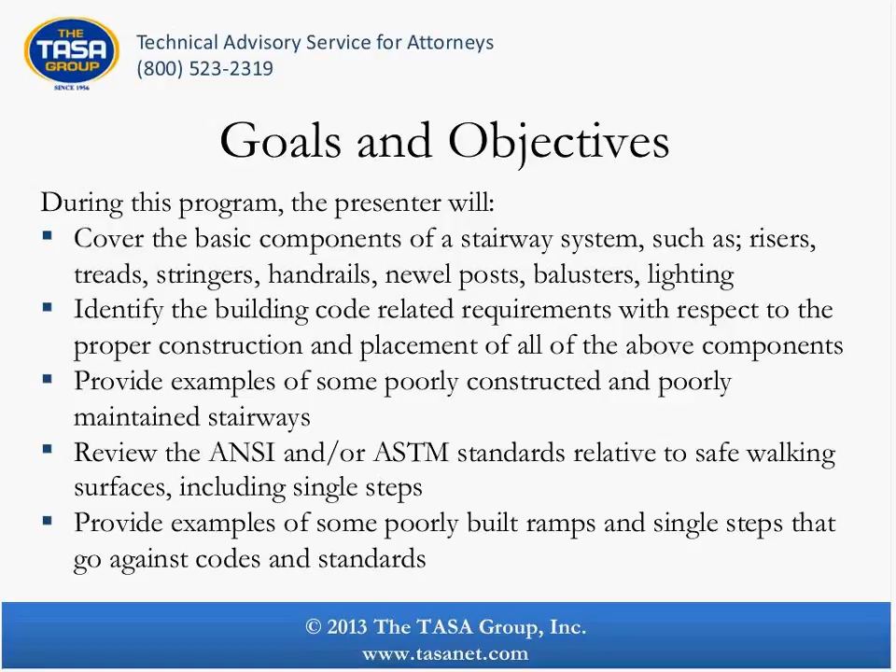During this program, the presenter will cover the basic components of a stairway system, such as risers, treads, stringers, handrails, newel posts, balusters, and lighting. We'll identify the building code related requirements with respect to the proper construction and placement of all of the above components, and provide examples of some poorly constructed and poorly maintained stairways. We'll review the ANSI and/or ASTM standards relative to safe walking surfaces, including single steps, and finally provide examples of some poorly built ramps and single steps that go against codes and standards.

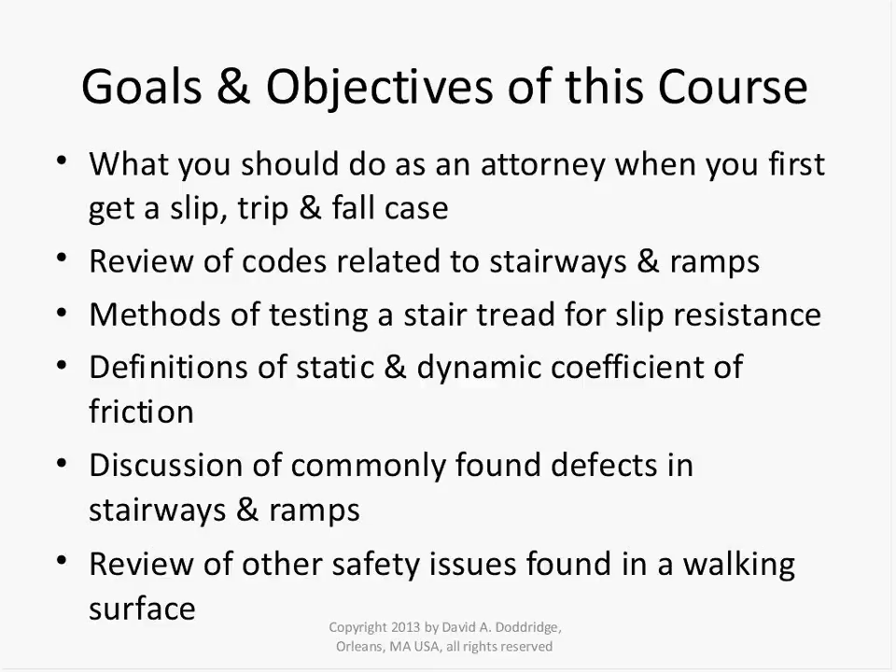The goals and objectives of this course: again, what you should, as an attorney, first do when you get a case. We're going to review codes, methods of testing a stair tread for slip resistance, some definitions of coefficients of friction, commonly found defects in stairways and ramps, and some other issues as well.

So what should you as an attorney do when you first get a slip and fall case? Go to the scene immediately. Take pictures from all angles in an attempt to preserve the scene. The more the merrier. You can't take too many pictures. There could be something in there that your expert that you may hire in the future would pick up on that you may or may not feel was important.

Sit and watch the scene for 20 minutes or so. Sometimes, and again, this is advice from other highly experienced personal injury attorneys, watch the scene. Just stand there and observe, and sometimes you can often find liability just by observation.

Weather conditions may or may not affect the scene. You want to find out what the weather conditions were on the day of your client's accident. It might be an outside stairway. It might be a stairway leading down into a subway, which I actually have some photographs of. And those are all subject to wet conditions.

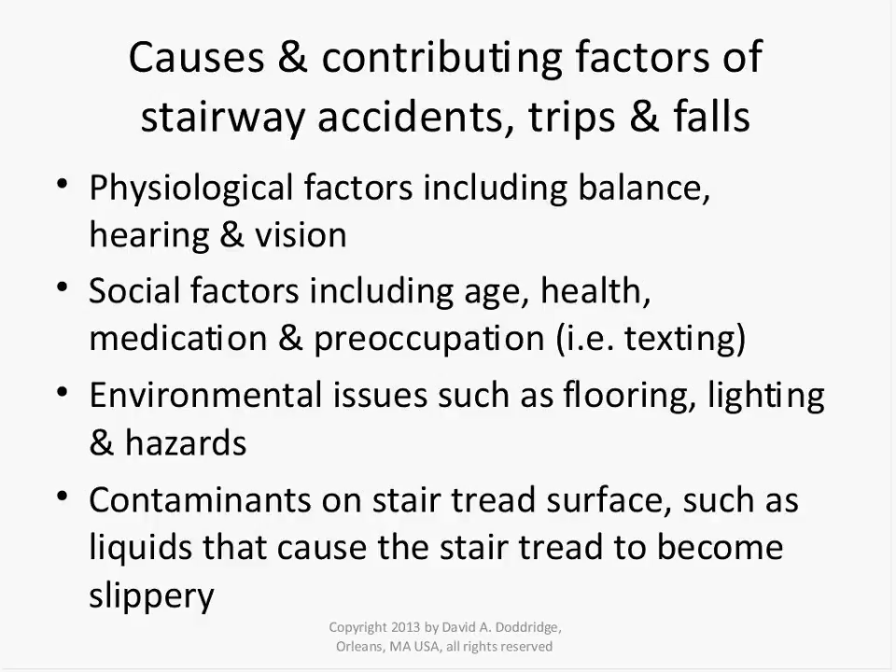So, causes of stairway accidents, trips, and falls: physiological factors, of course - balance, hearing, vision. One client of mine who gave me some advice for this presentation said that once he went out to a scene and observed a lot of older people walking up and down this stairway. Come to find out there were 4 nursing homes or complexes in the immediate area geared toward an older population, so there were much older people walking around that area.

Social factors, of course: age, health, medication, preoccupation like texting, which can certainly preoccupy somebody. Environmental issues such as flooring, lighting, and hazards - hazards meaning things that are in the way that could be moved. Contaminants on stair tread surface, such as liquids - maybe somebody spilled some coffee or water that could cause the stair tread or landing to become more slippery.

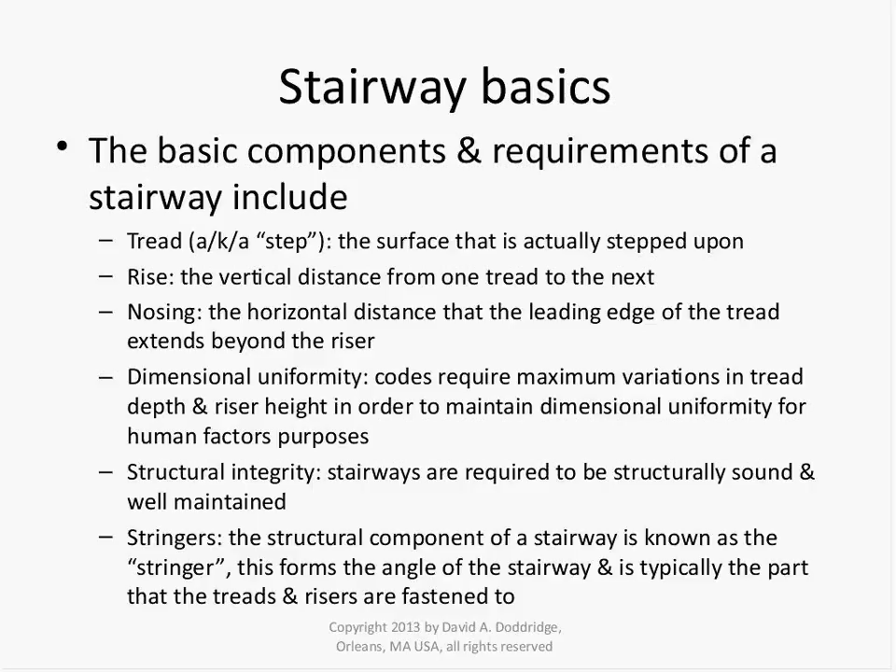Okay, now here we get into the basics of a stairway, basic components of a stairway. The tread, also known as the step, is the surface that is actually stepped upon. The rise is the vertical distance from one tread to the next. The nosing is the horizontal leading edge of the tread that sticks out beyond the vertical riser. And there are codes with regards to that, which we'll get into with some of the pictures and diagrams I have here.

Dimensional uniformity is important - codes require that the riser height and the tread or step depth not vary by more than 3/8 of an inch from one to the next. For human factors purposes, I've got some good examples of that as well. If you're walking down a stairway and each riser height is the same from one to the next, and then you get to the last one and it's an inch shorter, all of a sudden your foot finds ground much quicker, and that can cause some problems for certain people.

Structural integrity of the stairway, of course, should be well maintained. Stringers - I don't know if you've heard this term before - the stringer is the structural component of a stairway that the risers and treads are actually fastened to. So that's a structural component of the stairway.

Handrails, of course, we all know what handrails are. They are to be placed at a specific height above the leading edge of the stair tread - by leading edge, I'm talking about the front edge of the step. Handrails are to be no greater than 2 inches in width for gripping purposes.

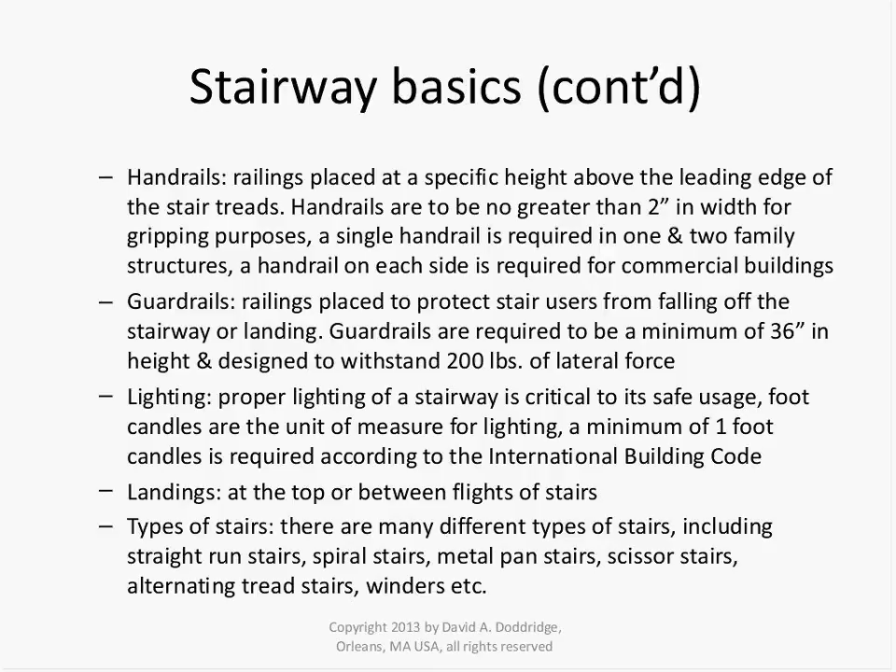A single handrail is required in 1- and 2-family structures, while a handrail on each side is required in commercial buildings.

The guardrail can also act as a handrail. However, if you observe a stairway where the handrail comes up to a landing or another level, and the railing is there, that would be considered a guardrail. Guardrails are required to be a minimum of 36 inches in height and designed to withstand 200 pounds of lateral force, which is a considerable amount of force.

I know somebody whose daughter lost her balance as she was ascending the stairway recently. Her body went up against the railing, the railing gave way, and she fell and broke her ankle. So that is certainly a code violation.

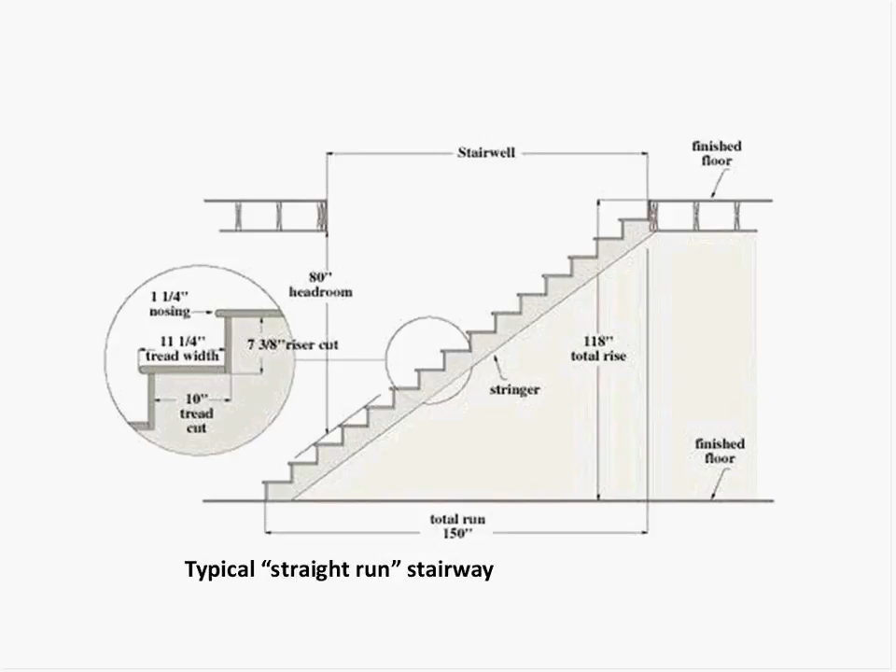Lighting, of course, is critical. Minimum lighting for a stairway at the tread level is 1 foot candle. A foot candle is a unit of measure used to measure the strength of lighting.

Landings, of course, are located at the top or in between flights of stairs.

There are lots of different types of stairs that we see: straight run stairs, spiral stairs, metal pan stairs, scissor stairs, alternating tread stairs, winders, etc. And I have some visual examples of all of that.

This is a straight run stairway. This is a close-up view of the relationship between the riser, the tread, and the nosing.

This is the riser height right here. This is the tread depth or width right here. And this piece here is known as the stringer, which is a structural piece upon which the treads and risers are attached.

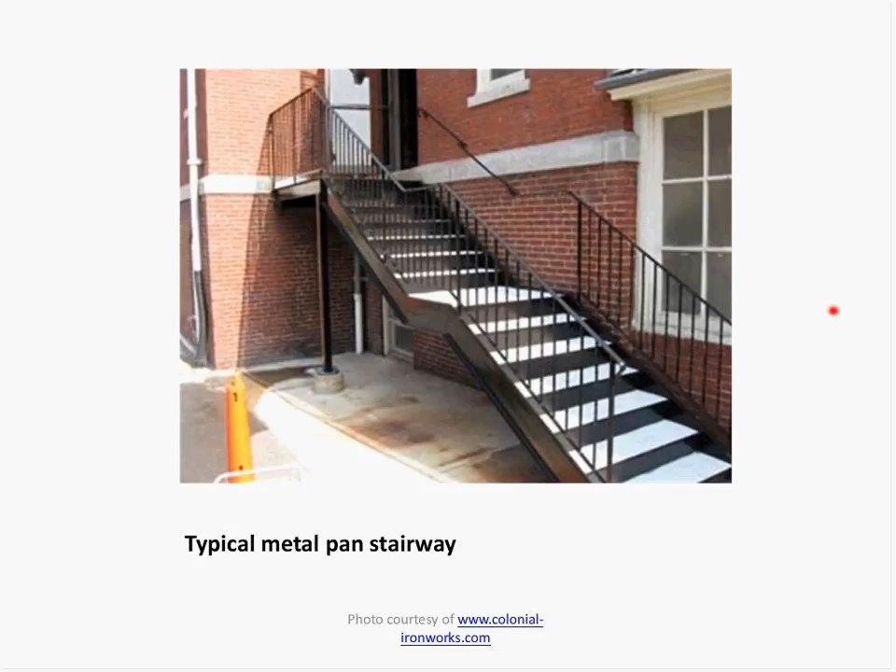This is the headroom of 6 feet 8 inches, or 80 inches, measured from the leading edge of the treads up to this point. So that is a straight run stair.

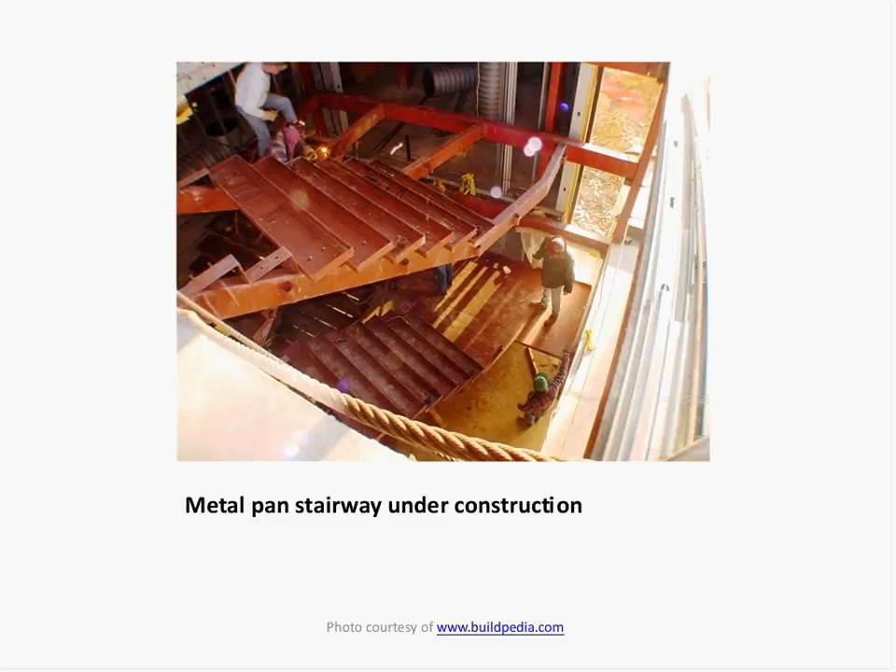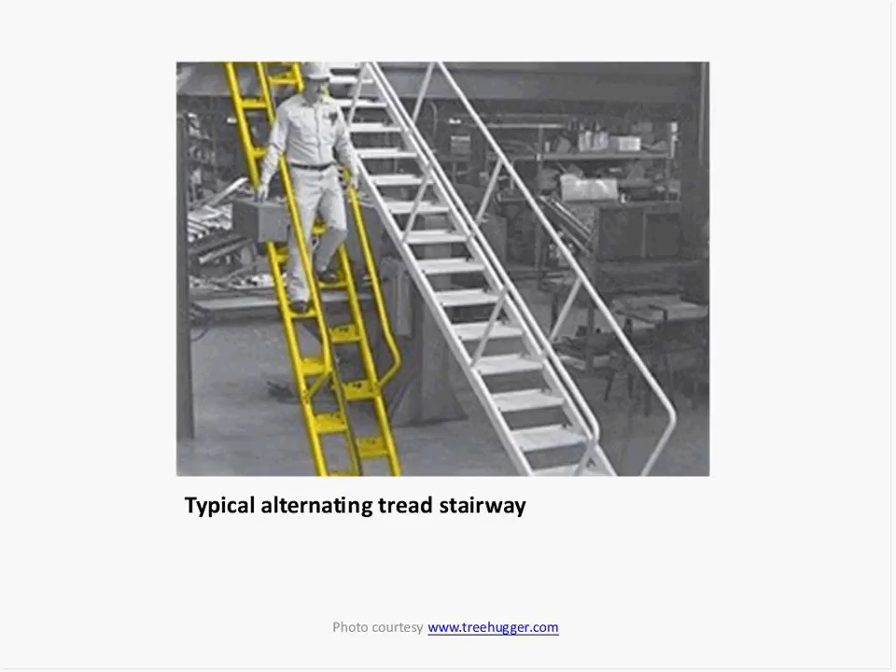Here's a metal pan stairway under construction, to illustrate what we mean by a metal pan stairway. Here's the stringer right here, and here are the steps or the treads. These get filled in, so they're in the shape of a pan, filled in with concrete.

Metal pan stairways, as per OSHA guidelines, are not allowed to be used by workers, other than those assembling it, until the pans are filled in with concrete or a temporary wood surface. They may not want to pour the concrete during a certain phase of construction because it's messy and takes time to dry and set up and so on.

This is an alternating tread stairway, which has very limited allowed uses under the building code, and for obvious reasons. They're not safe. They're a space saver.

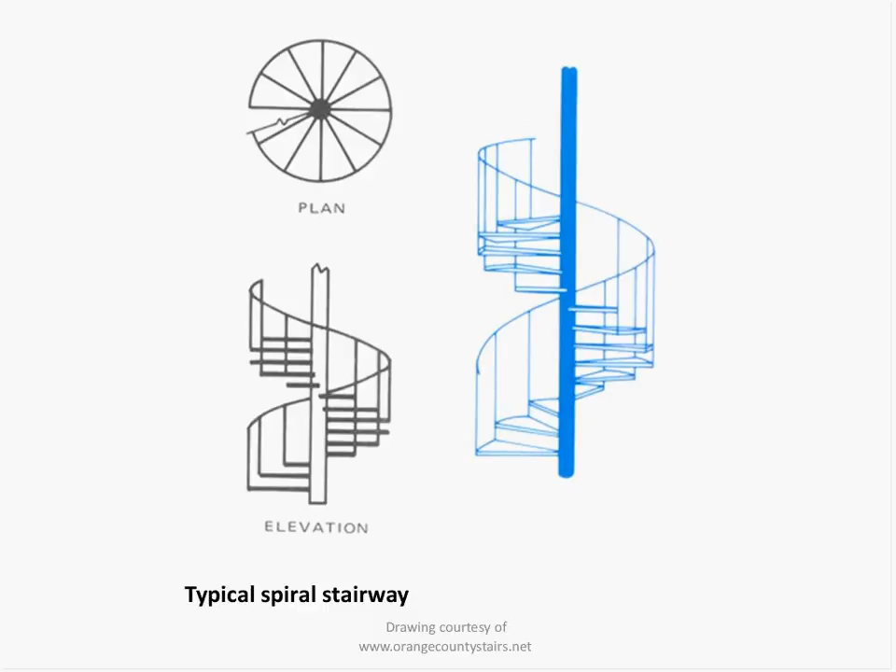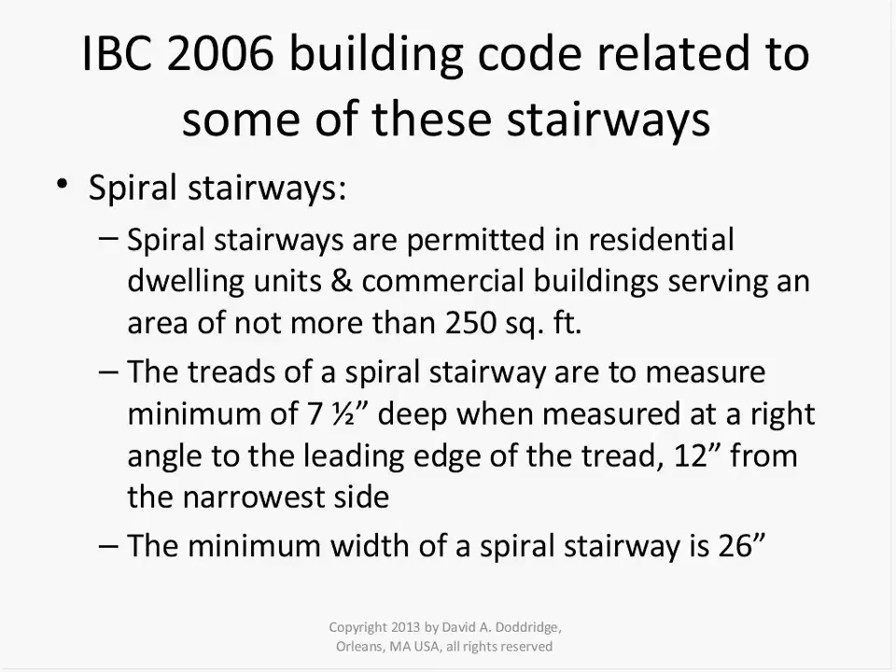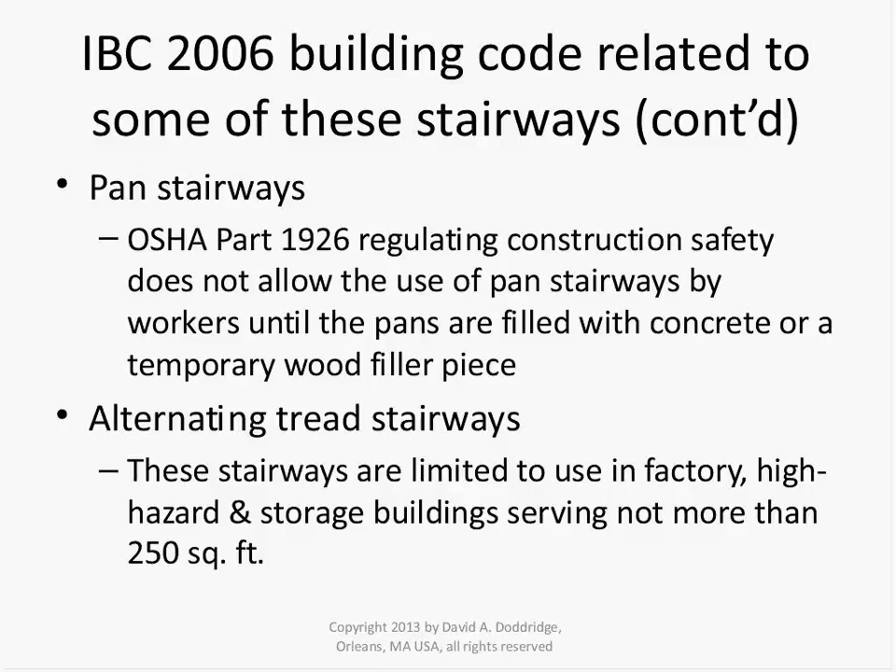The IBC 2006 Building Code, from the International Code Council, authors building codes known as model codes. They are adopted by states and municipalities as their own building codes, sometimes with amendments. For example, Rhode Island has adopted the IBC 2006 with Rhode Island amendments, usually dealing with areas subjected to more wind load. They're usually not amendments that affect a basic building component such as a stairway; it's more specialized than that.

Spiral stairways are permitted in residential dwelling units and commercial buildings that serve an area of not more than 250 square feet, which is a small area, like maybe a mezzanine. The treads of a spiral stairway must measure a minimum of 7.5 inches deep when measured at a right angle to the leading edge of the tread, 12 inches from the narrow side.

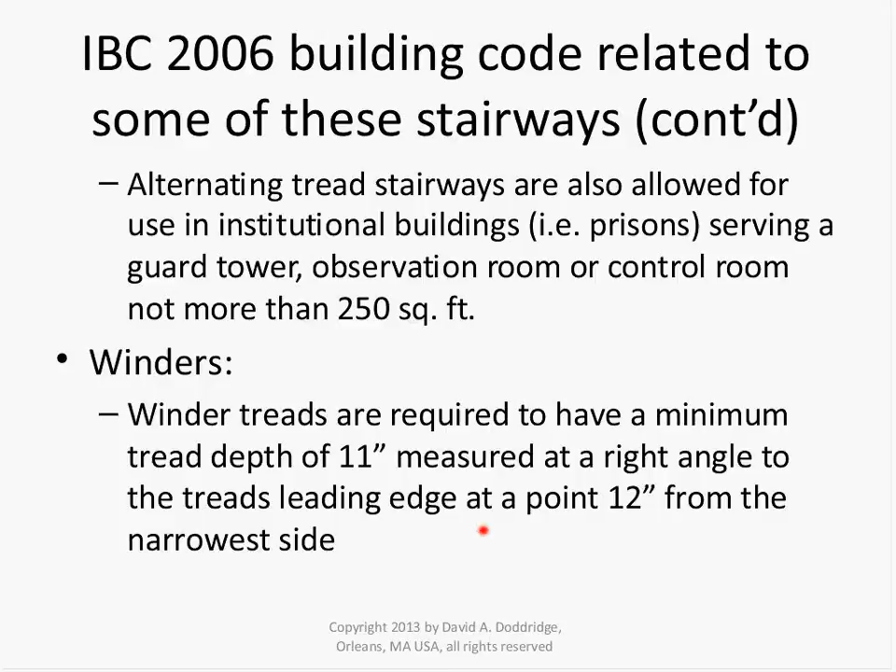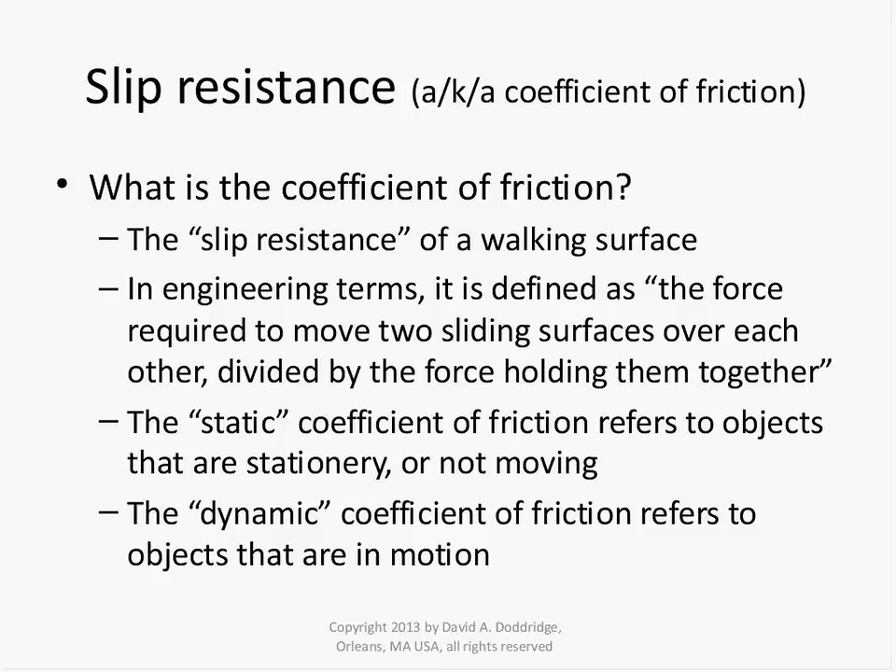So if we go back to... when you measure 12 inches out from this edge at a right angle, it is not to be less than 7.5 inches in this direction. So that's an example of what is in the IBC 2006 relative to codes related to spiral stairways.

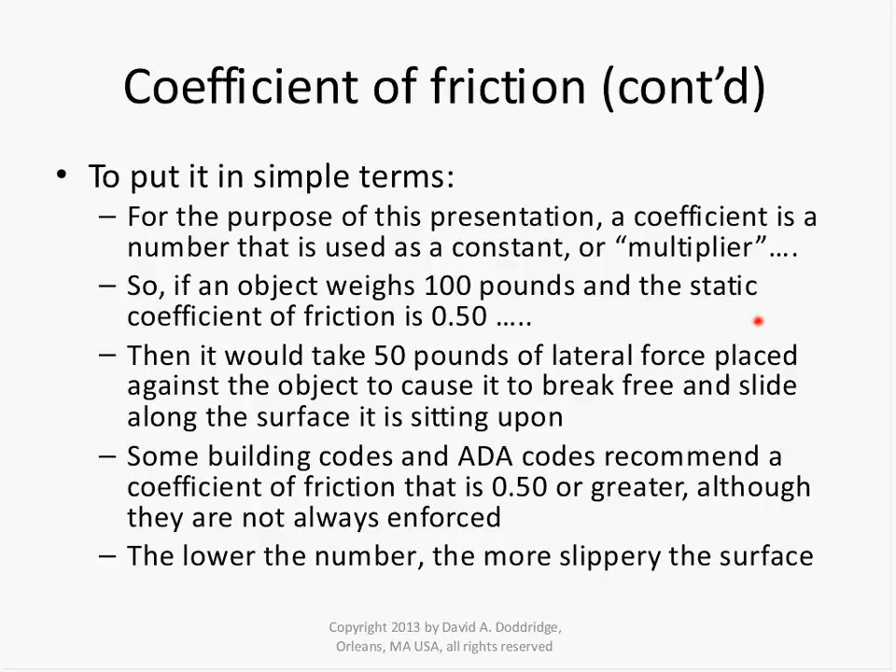Pan stairways, as I mentioned earlier, OSHA Part 1926, which regulates construction safety, does not allow the use of a pan stairway by workers until the pans are filled in. I had a case in Connecticut with this exact scenario. The pan stairway was built, the railing had not been installed yet, the pans had not been filled, and an older man, a plumber working on site, decided to use that stairway even though it was sort of blocked off. His foot caught on the edge of the pan, and he fell 12 feet over the side since there was no railing installed yet. He really got hurt.

Alternating tread stairs are very limited in their use. They can be used in factory, high hazard, and storage buildings serving an area not more than 250 square feet, which again is a pretty small area. Alternating tread stairways are also allowed in institutional buildings, such as prisons, serving maybe a guard tower, observation room, or control room, again not more than 250 square feet.

Winders. Winder treads are required to have a minimum tread depth of 11 inches, unlike a spiral stairway which is 7.5. Again, you measure from the narrow side 12 inches out along the leading edge. At a right angle, you measure 11 inches in, not to be less than 11 inches.

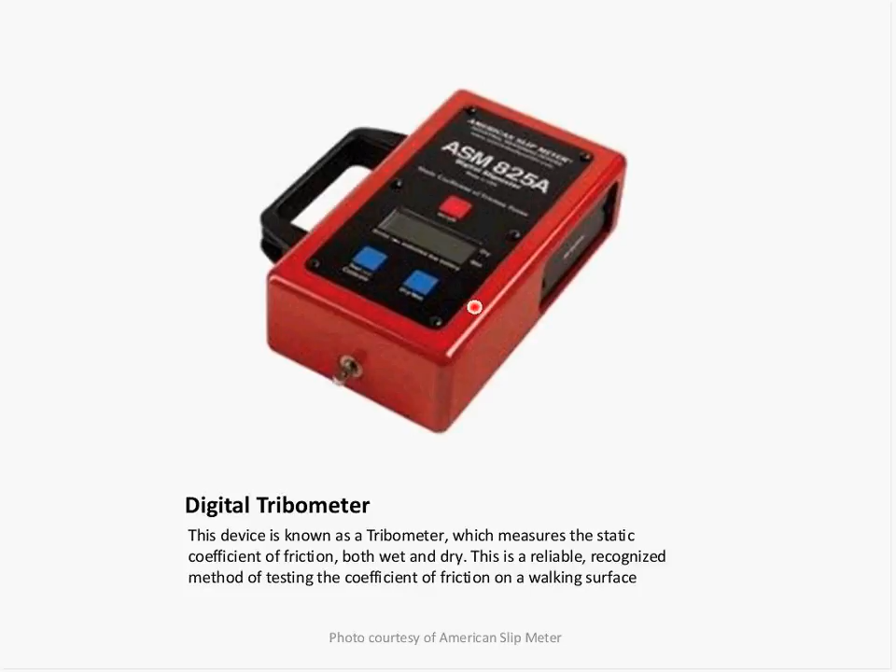Now we're going to get into the coefficient of friction. What is the coefficient of friction? It defines the slip resistance of a walking surface. In engineering terms, it's the force required to move two sliding surfaces over each other, divided by the force holding them together. I'll simplify that in a moment.

Static coefficient of friction refers to objects that are stationary, like your coffee cup sitting on your desk. Dynamic coefficient of friction refers to objects that are in motion, like a toboggan sledding down a hill. To put it in simpler terms, coefficient is a multiplier, a constant that is used. So if an object weighs 100 pounds and the static coefficient of friction is 0.50, you multiply 100 pounds times 0.5, and you come up with 50 pounds of lateral, sideways force placed against the object to cause it to move or break free of its static friction.

Building codes and ADA codes recommend a coefficient of friction of 0.5 or greater. They're not always enforced. Actually, ADA is 0.6, and for ramps, ADA recommends 0.8. The lower the number, the more slippery the surface.

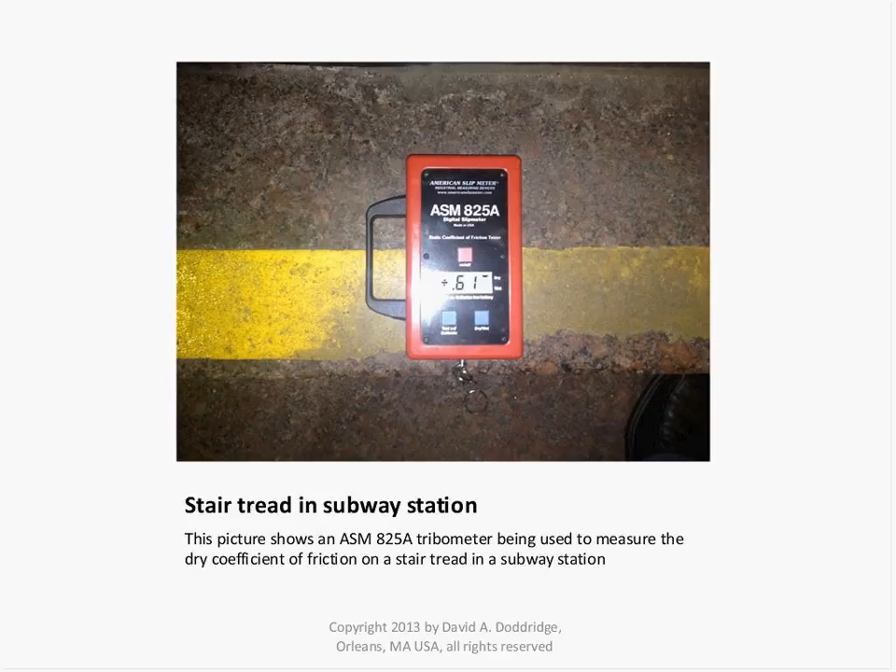This is a tribometer, a device used to measure the coefficient of friction. This is the one that I use. It is a reliable, recognized method of taking the measurement.

There are 3 feet on the bottom that screw in that have neolite pads on them. Neolite is the typical shoe material. It comes with a line and a ring that you hook onto this device, this little end here. You hold your hand out in this direction, place it upon the floor, and use your index finger to pull that line gently but steadily until the tribometer moves. When it moves, that means it has broken free of its static friction, and it will record that measurement right up in here. So that is a tribometer.

This is my tribometer that I used to measure the coefficient of friction on the stairway in a subway station. An experienced personal injury attorney wanted me to measure this set of stairs and another set of stairs that he felt would be safer. And in fact, he was right — the coefficient of friction on the other set of stairs was considerably higher than on this particular stairway. They're both at subway stations in the same city. I think he was trying to present his case as if to say, look, this subway station stairway is safer than the one my client was injured in. So I thought that was interesting.

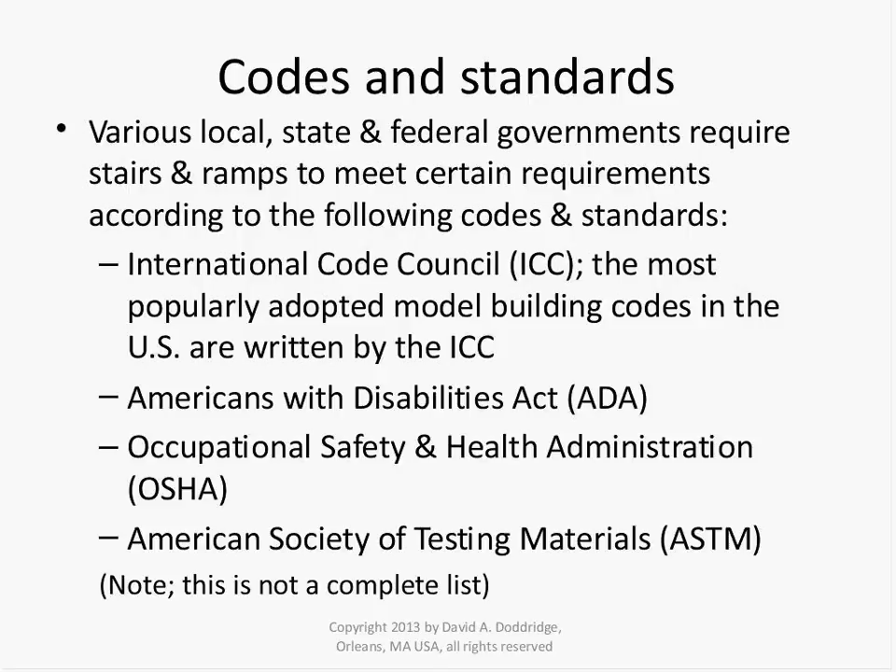That's one of the reasons why you want to make note of the weather on the day of your client's accident, and the time of day, if it's an outside stairway, which would provide more or less natural light. So if the accident happened on a sunny day, you want to inspect the stairway under similar circumstances, but that's about all you can really do. Some of these cases are a couple of years old. But I think that's one of the reasons why the attorney clients I consulted for this presentation suggested going to the scene immediately and interviewing witnesses immediately, so you can try to preserve the scene. That's about it.

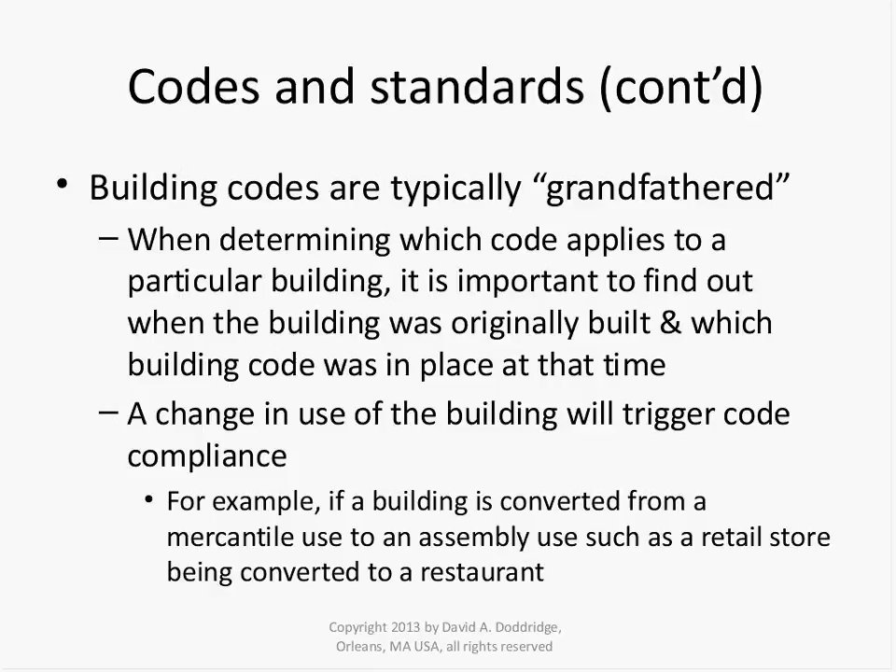It depends on the area that you're testing or auditing the floor in. 0.5 or greater is always the goal. In certain other situations, 0.6 is going to be the goal — for example, in a wet area like the side of a pool deck, it's always wet. If it's wet and it measures 0.6 or greater, then you're in pretty good shape. And of course, ADA recommends 0.8 on a ramp. So 0.5 to 0.6 or greater, whether wet or dry, would be considered good.

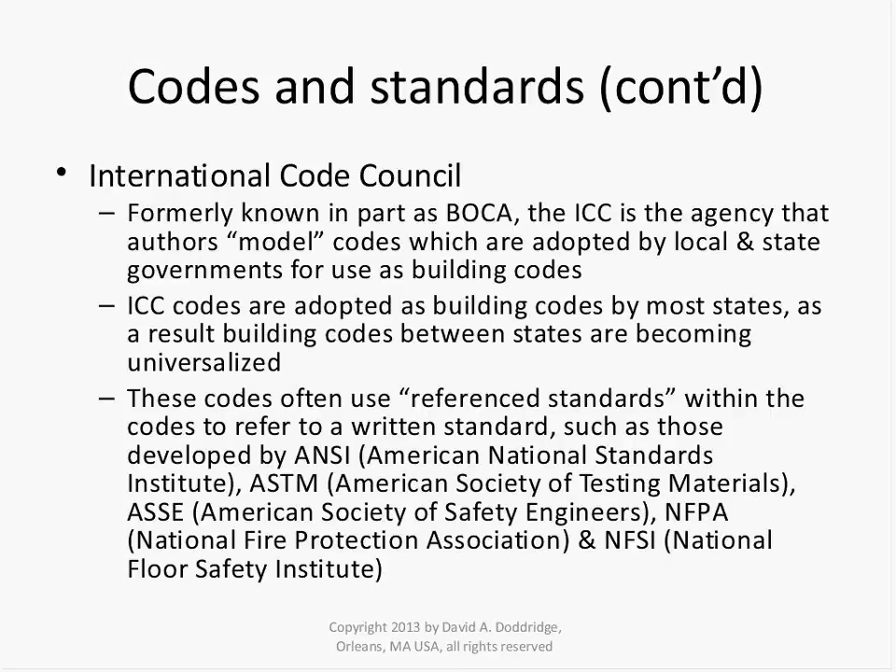A public park is not really necessarily subjected to building codes. Building codes are for the purposes of planning and designing a building — a park is not a building. So that being the case, there would be other standards or codes that could apply.

Typically, commercial buildings with an occupant load of 50 or more, for interior stairways or stairways that lead directly up to the building, are going to require handrails on both sides of the stairs. We're going to get into that with some drawings that I have here.

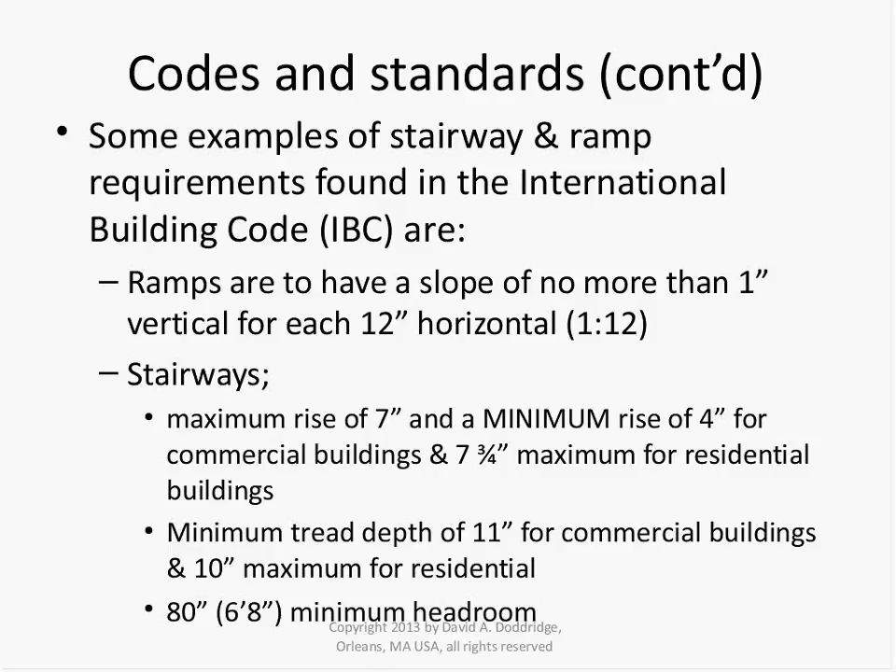But an outside park wouldn't necessarily be subjected to compliance with a building code. There could be other codes or standards that would be more specific to the municipality that the park is located in.

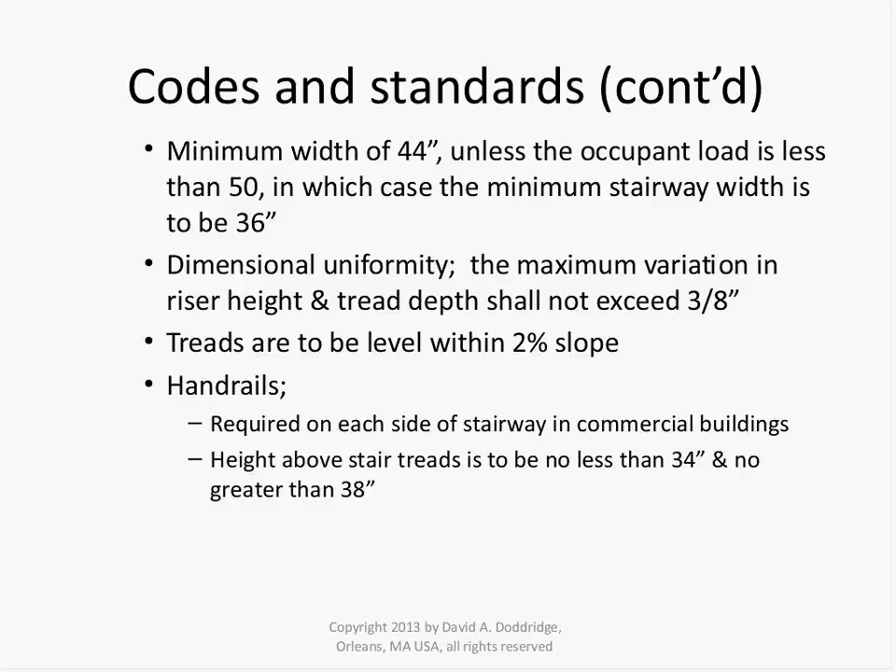Building codes are typically grandfathered in. So when you determine what code applies to a particular building, it's important to find out when the building was originally built and which code was in place at the time. In New York, for example, an old theater—it was built as a theater, it still is a theater, and as long as it's always been a theater, the codes in place at the time of the theater's construction are the codes that apply to the building today.

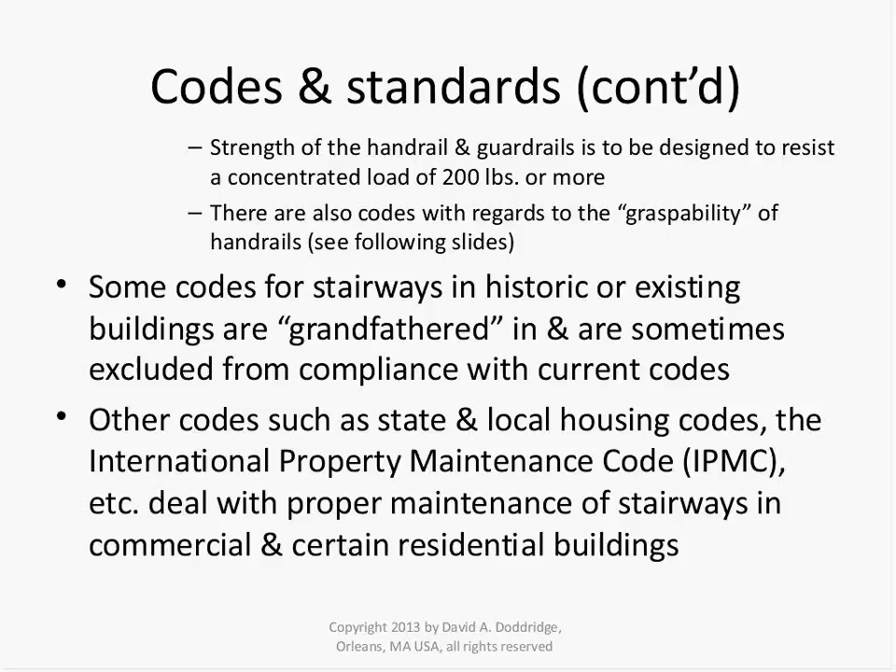When you have a change of use in a building or a space within a commercial building, that triggers code compliance. For example, if the building is converted from mercantile to assembly—such as a retail store being converted to a restaurant—then the restaurant would have to comply with codes relative to assembly usage rather than mercantile usage. So that triggers code compliance.

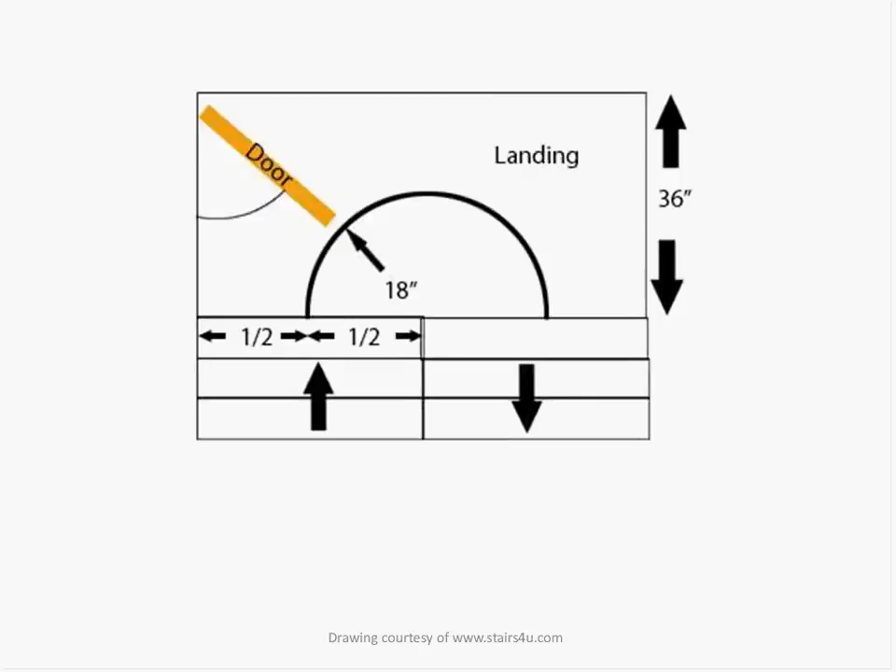The International Code Council, formerly known in part as BOCA, is the agency that offers model codes that are adopted. Many states are adopting ICC codes, so codes from one state to the next are really becoming quite universalized and standardized.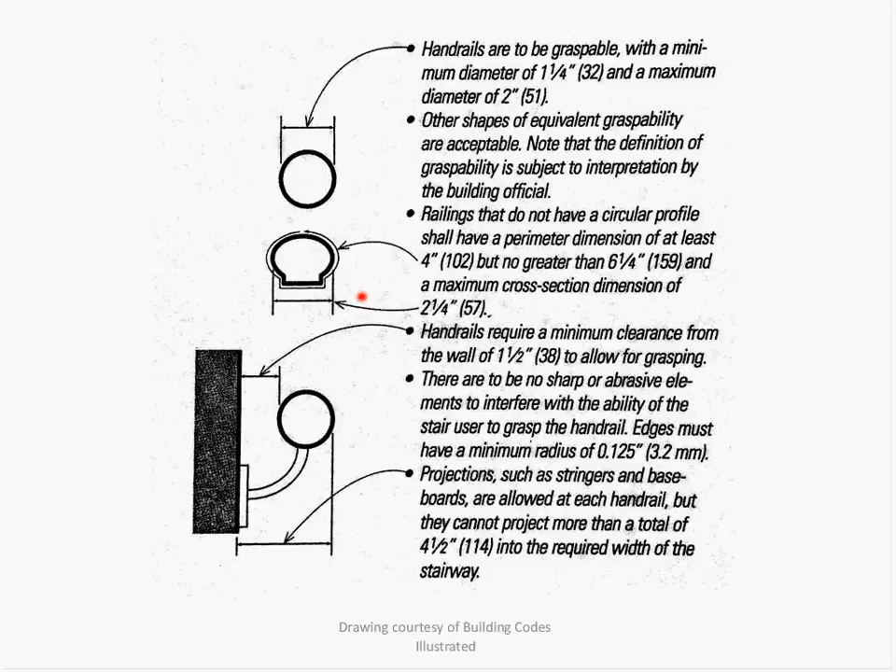Within these building codes, they use reference standards. Some of those standards are developed by ANSI, by ASTM, and ASSE—the American Society of Safety Engineers—is a popular one. These are all private nonprofit organizations that write these standards, and those standards are listed in building codes as reference standards, usually in an appendix. In the writing of codes, it will say that a door is to meet NFPA such and such standard for fire protection, and that kind of thing. So that's how codes work.

Some examples of stairway and ramp requirements found in the IBC: ramps are to have a slope of no more than 1 inch vertically for each 12 inches horizontal. So if you measure horizontally 12 inches, it cannot rise more than 1 inch. That's for a ramp.

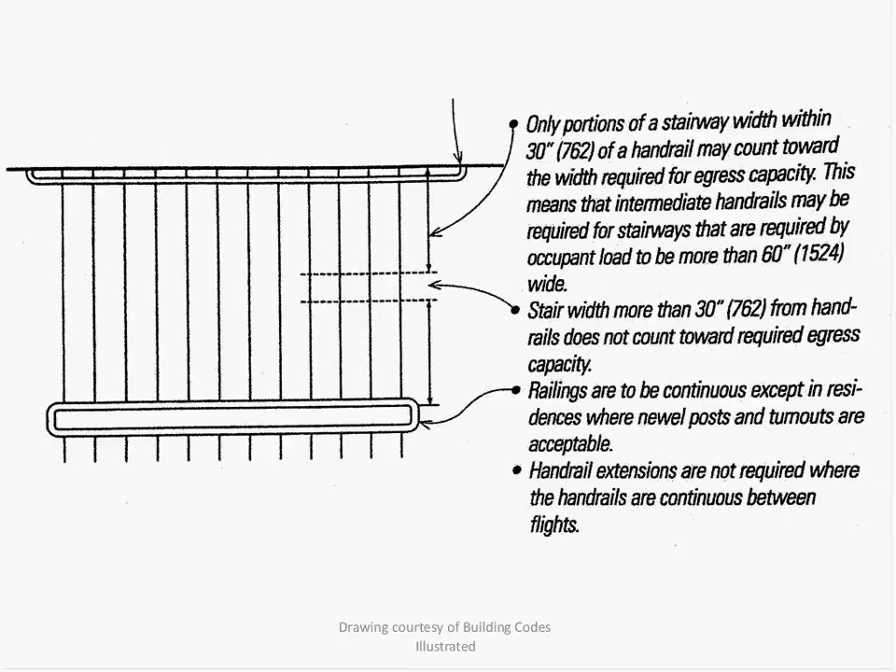Stairways have a maximum rise of 7 and a minimum of 4 for commercial buildings. Minimum of 4 because if it's less than that, it really just causes a trip step—I've got an example of that. 7 3/4 is the maximum for residential. Minimum tread depth in commercial is 11 inches, minimum of 10 for residential, and the headroom is 80 inches minimum.

Minimum width of 44 inches unless the occupant load is less than 50, in which case the minimum width can be 36. We discussed dimensional uniformity earlier—the variation in tread depth and riser height shall not exceed 3/8 of an inch throughout the entire stairway, and the treads are to be level to within 2% of the slope.

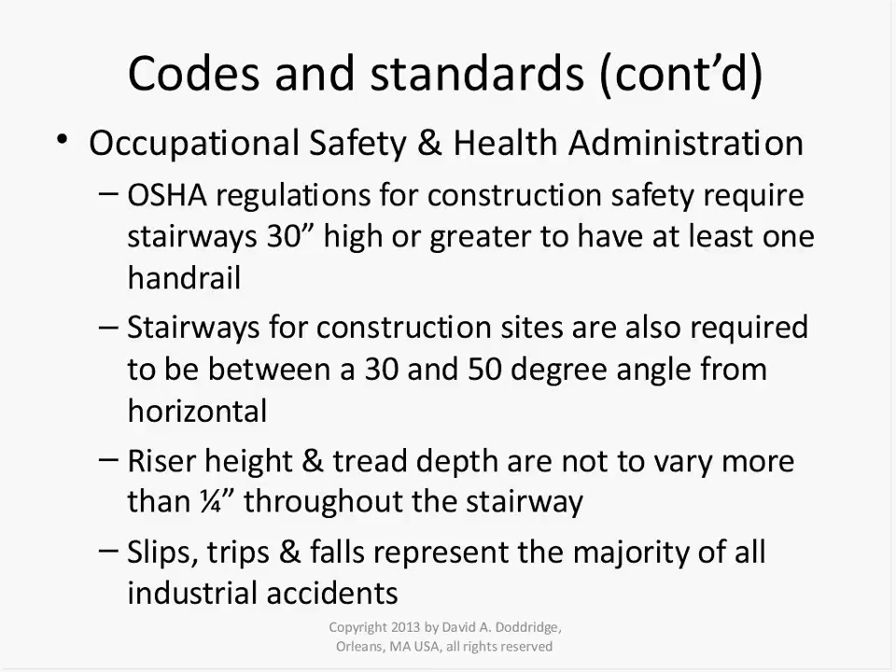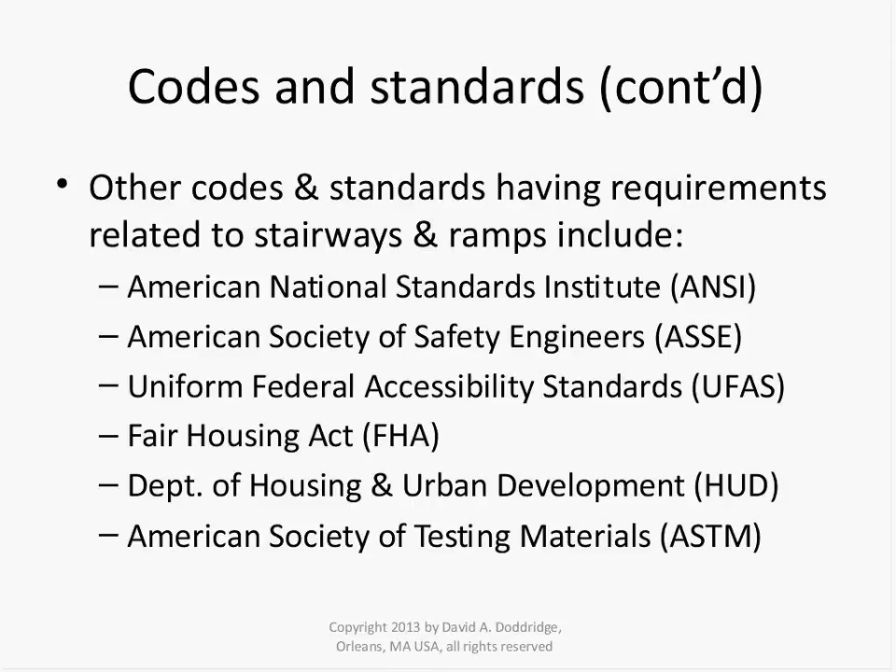Handrails are required on each side in commercial buildings, and are to be placed no less than 34, no greater than 38 inches above the leading edge of the treads, which I showed you earlier on that stairway diagram I pulled up. The strength of the handrail and guardrails is a concentrated load of 200 pounds. There are also codes regarding the graspability of a handrail, so we'll discuss that in the following slide.

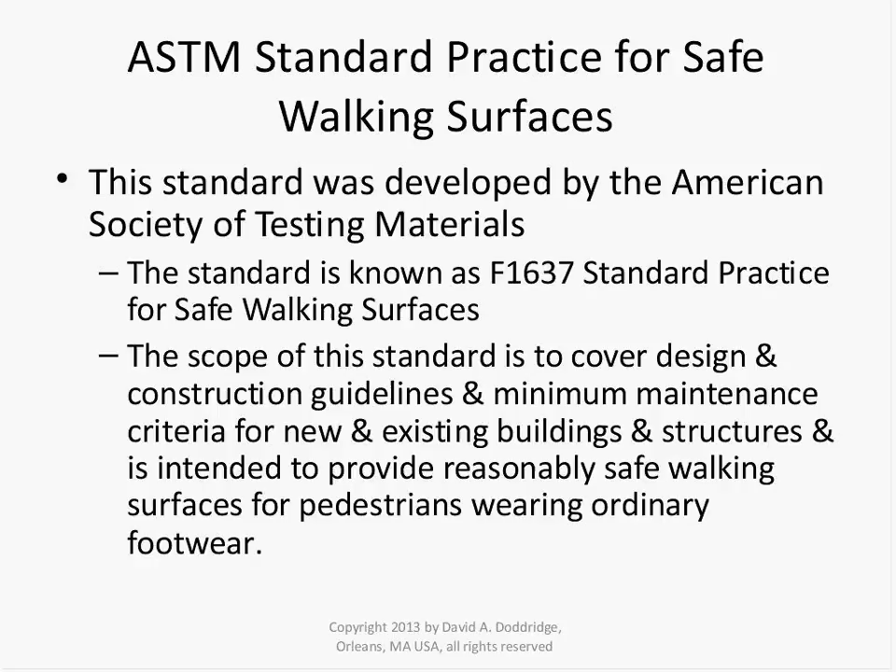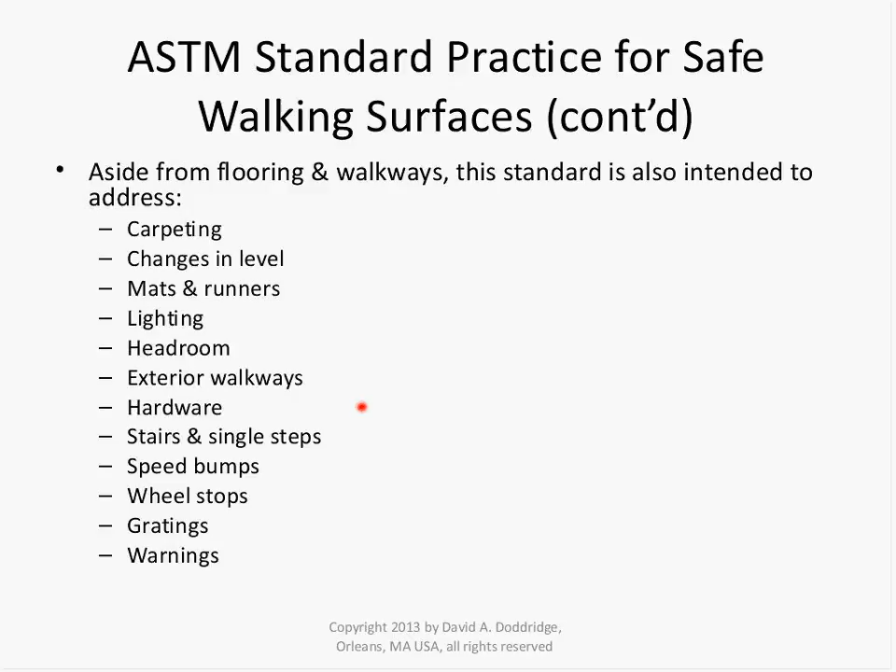Some codes for stairways in historic buildings are grandfathered in. I was in a commercial building recently—an old house being used as a law office—and the stairway clearly was not in compliance. It was an original stairway. It would have disturbed the historical integrity of the inside of the building and would have caused, if they were to reconstruct it, a considerable amount of work. So sometimes they're grandfathered in.

There are other codes, state and local housing codes, and the International Property Maintenance Code, authored by the ICC, that deal with proper maintenance of stairways in commercial and certain residential, like rented, buildings.

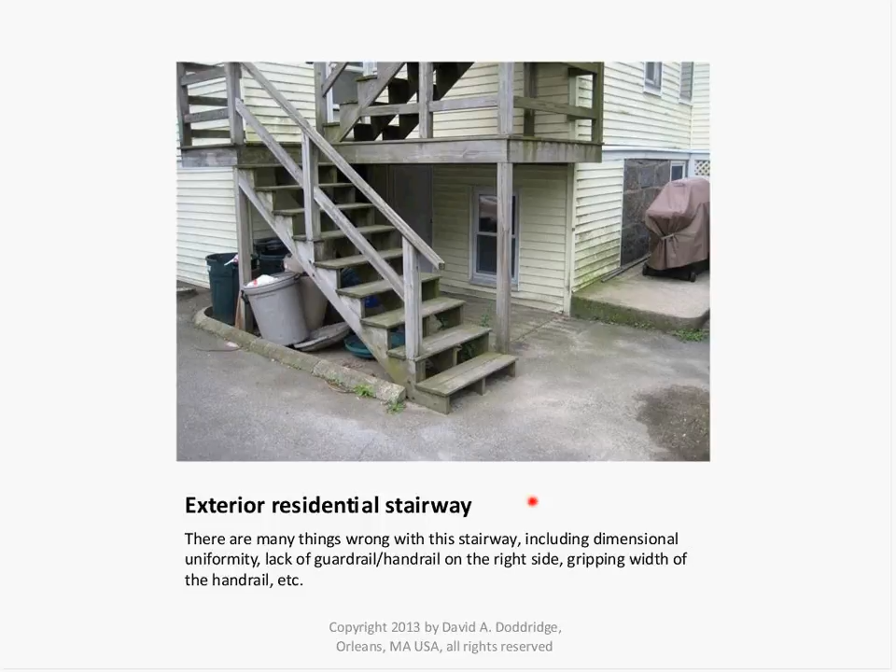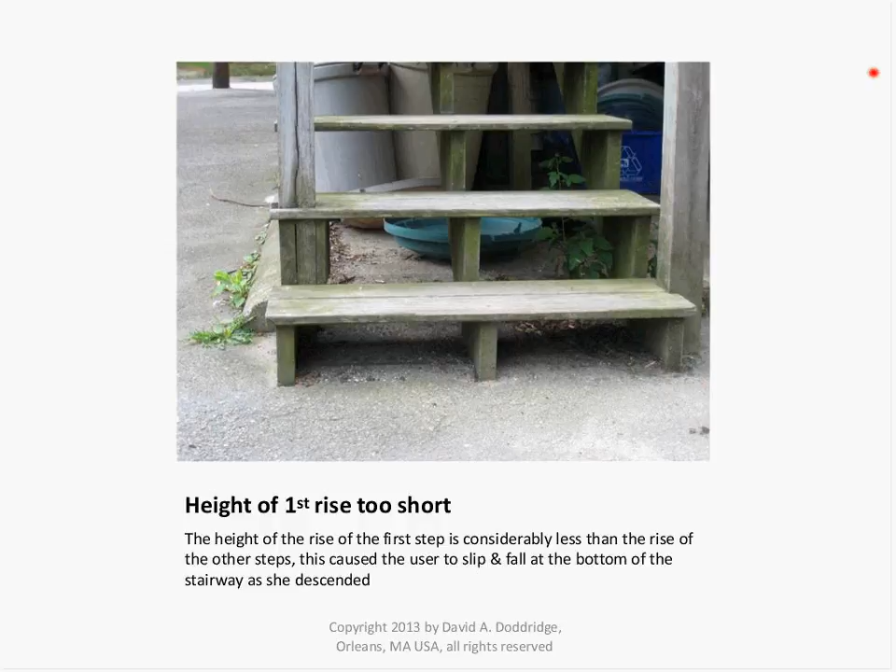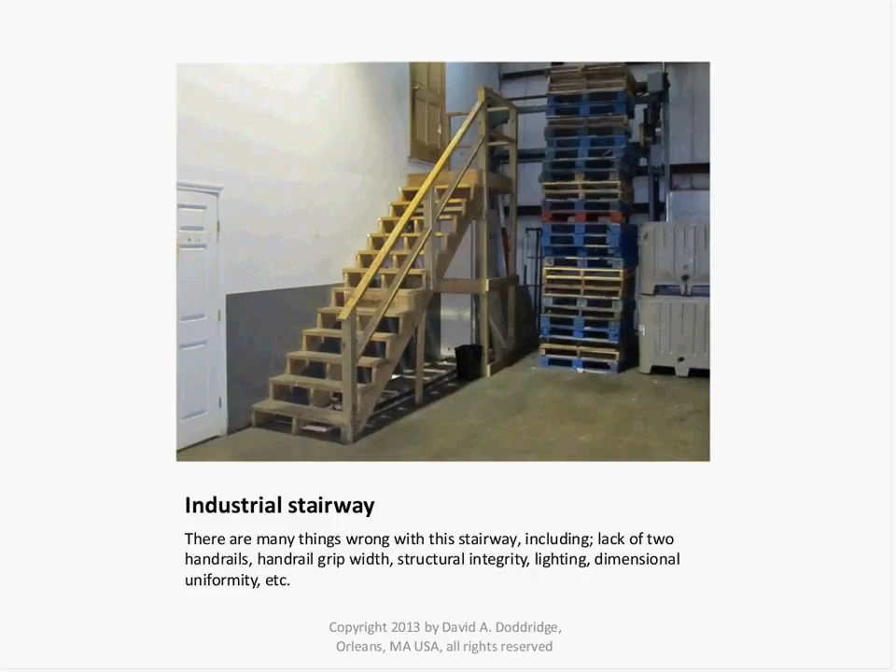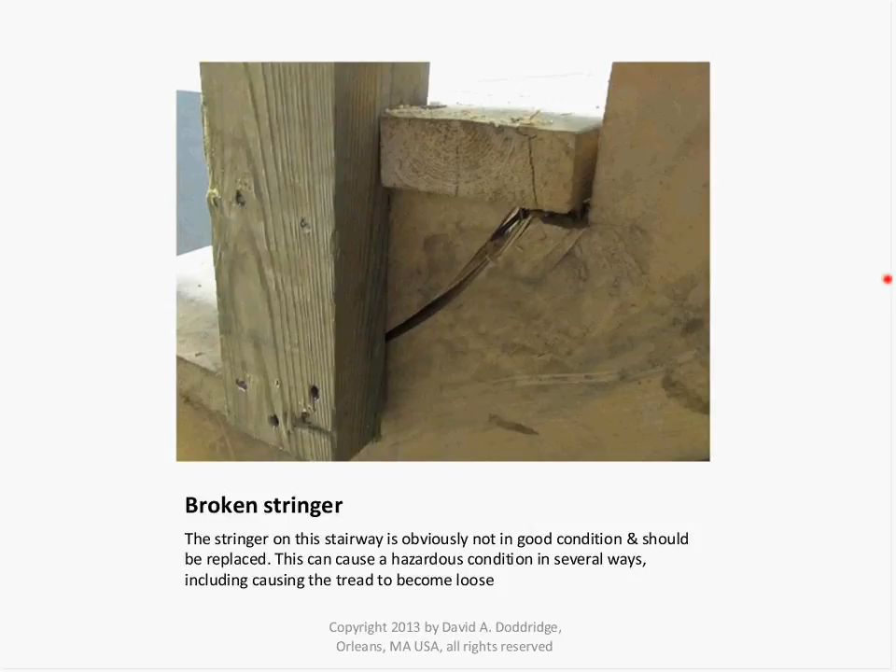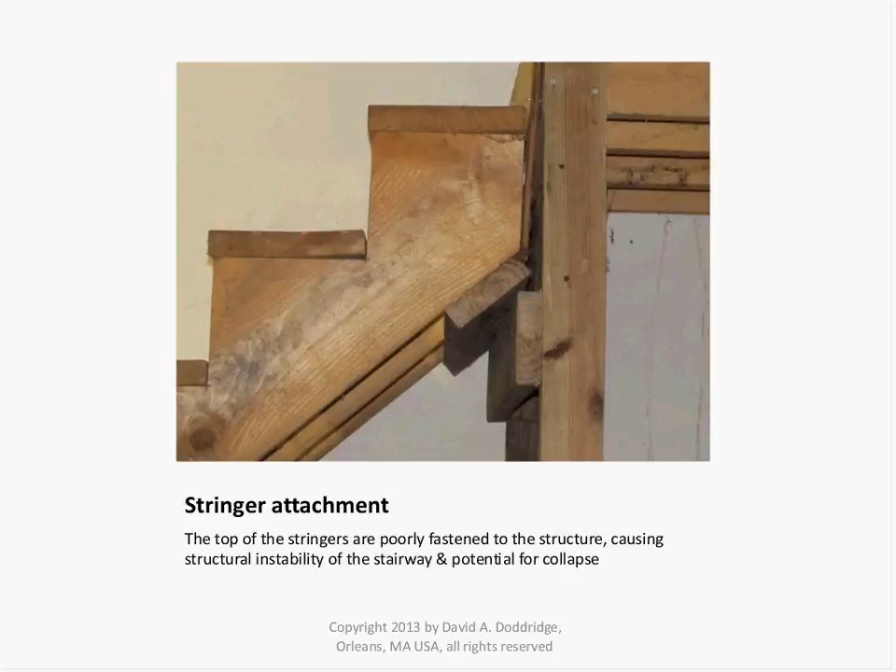If the handrail is round, the diameter can't be more than 2 inches. If it's not round, the perimeter measured around the entire shape cannot be less than 4 inches and no greater than 6 1/4 inches, with a maximum cross-section width of 2 1/4 inches. The handrail also has to have some clearance between the wall and the handrail, all for the purpose of being able to grasp it.

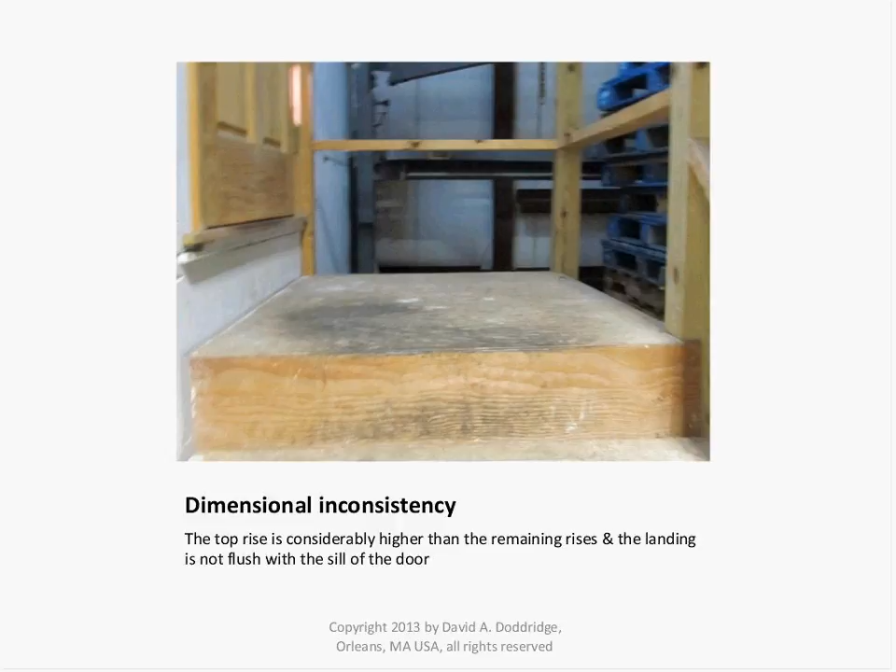Handrails are to be within 30 inches of you when walking down a stairway—you have to have a handrail within 30 inches of you. That relates to how many handrails are necessary based on the width of the stairway and the occupant load.

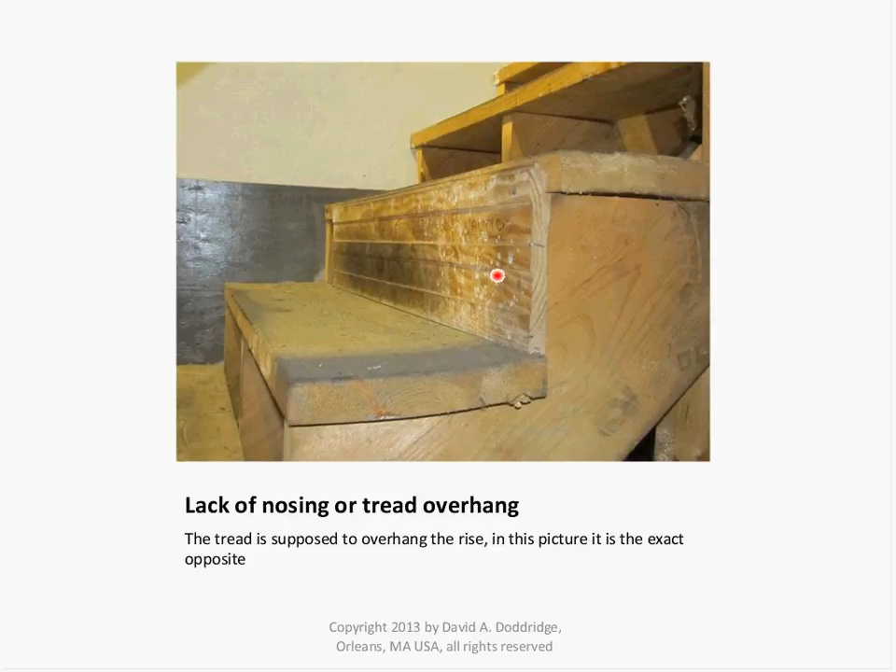Accessibility codes for persons with disabilities: the ADA/AG, where AG means Accessibility Guidelines. Again, ramps no steeper than 1 in 12, and the coefficient of friction on ramps 0.8 or greater. Aside from the ADA, state and local governments also have their own regulations regarding accessibility, so you really have to be in compliance with all of those.

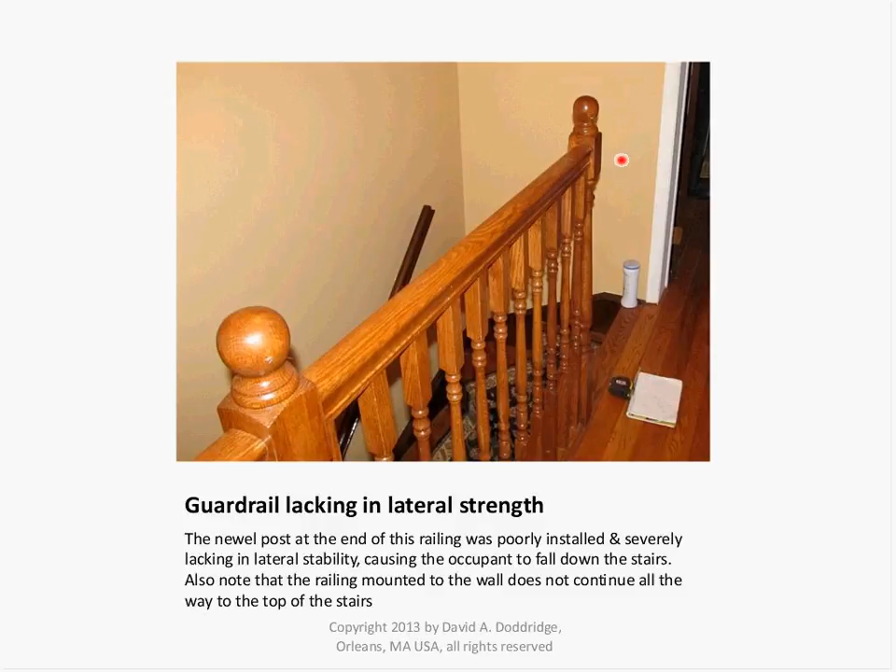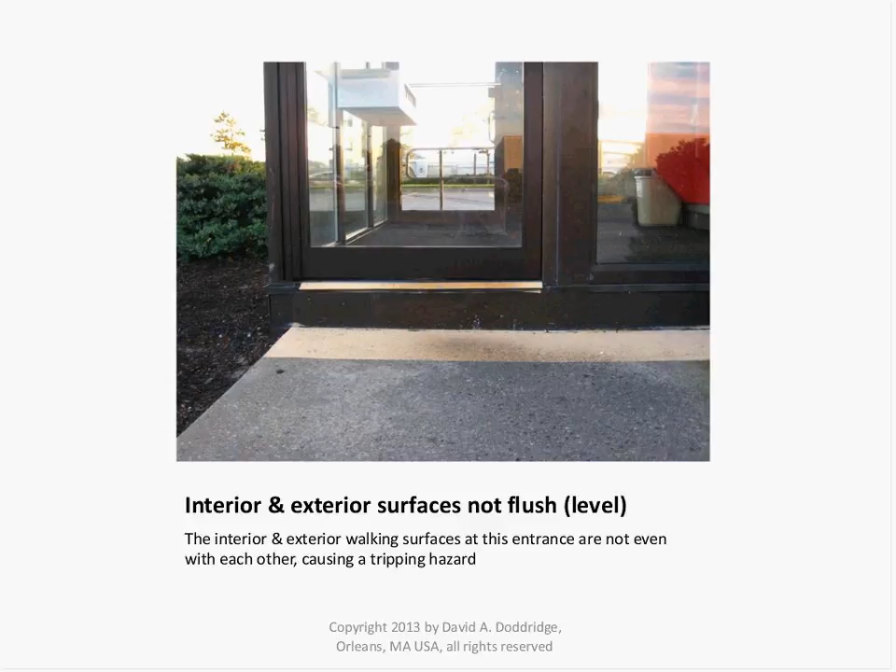OSHA, for a construction stairway like a temporary stairway on a construction site, applies at 30 inches high or greater. It has to have at least one handrail. They have to be built within a 30 to 50 degree angle from horizontal, and the dimensional uniformity within the stairway has to be no greater than 1/4 of an inch, as opposed to building codes, which require 3/8 of an inch. So that's close, but not exactly the same.

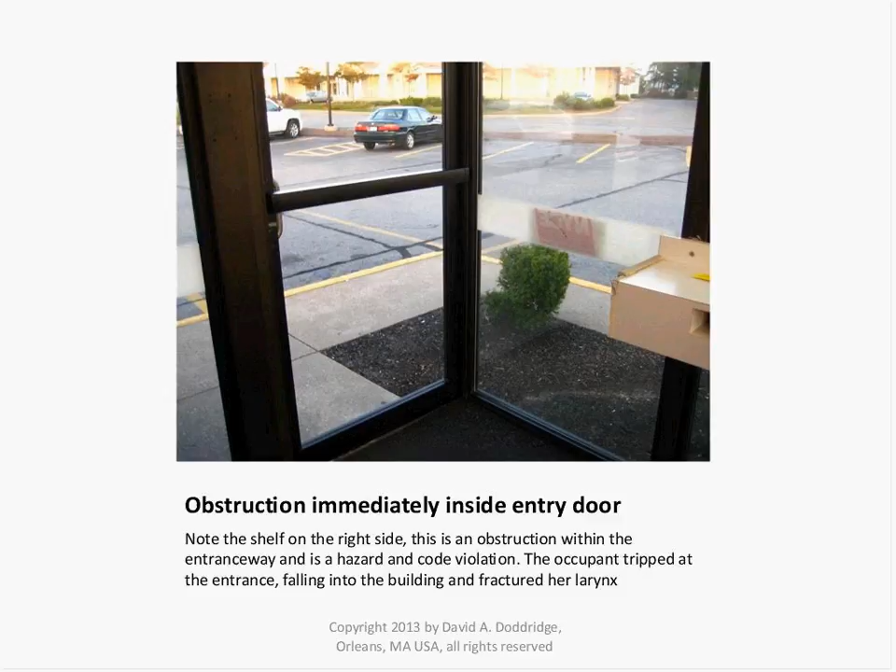Other codes and standards related to stairways and ramps that are out there: ANSI writes them, ASSE writes them. The UFAS, which is the federal standard, Fair Housing Act, HUD, and ASTM all have codes and standards relative to stairways and ramps.

This one is the ASTM standard practice for safe walking surfaces. I use this one on a pretty regular basis because it covers a lot. It's known as Standard F1637. The scope is to cover design and construction guidelines, and minimum maintenance criteria for new and existing buildings, and it addresses all these different things.

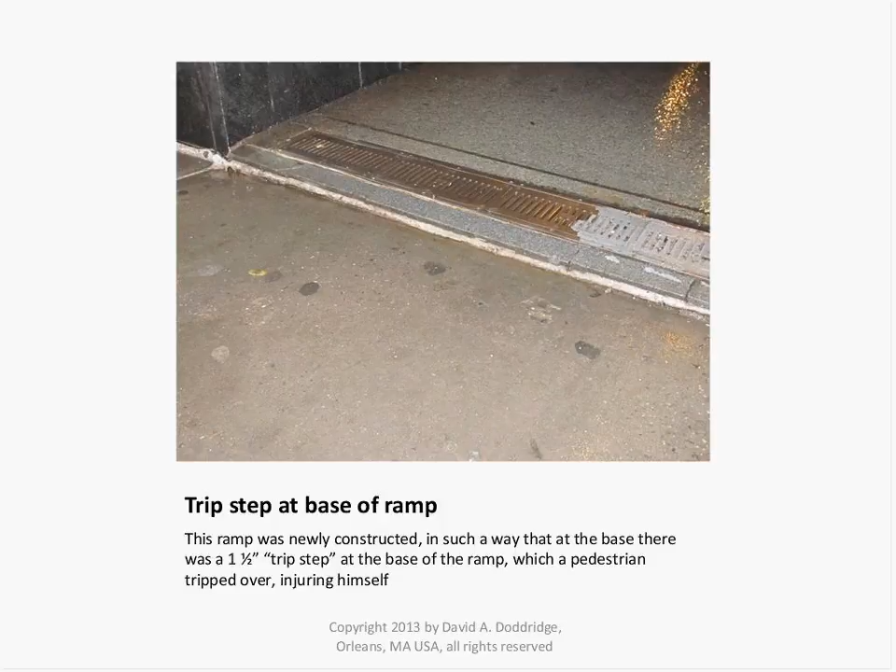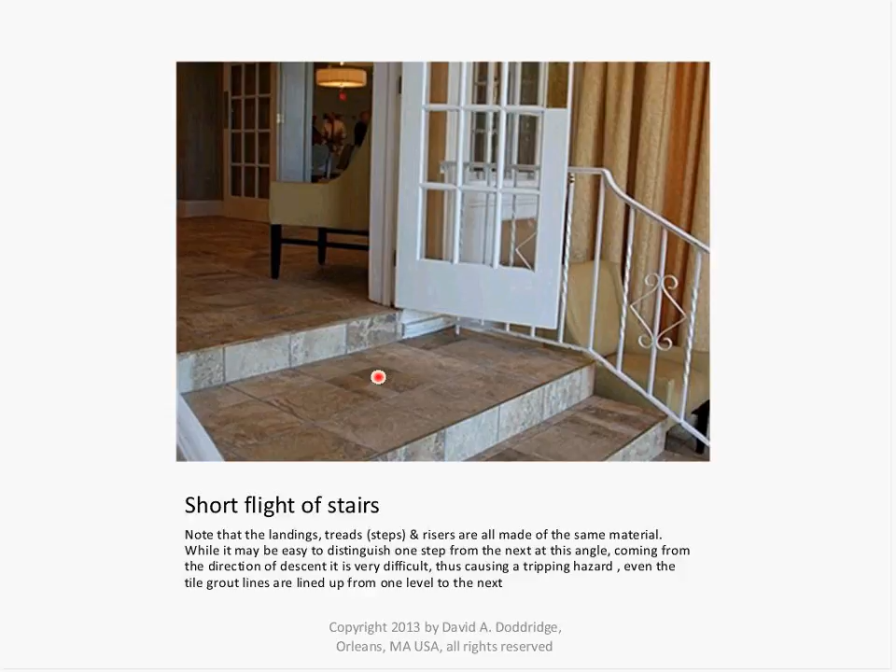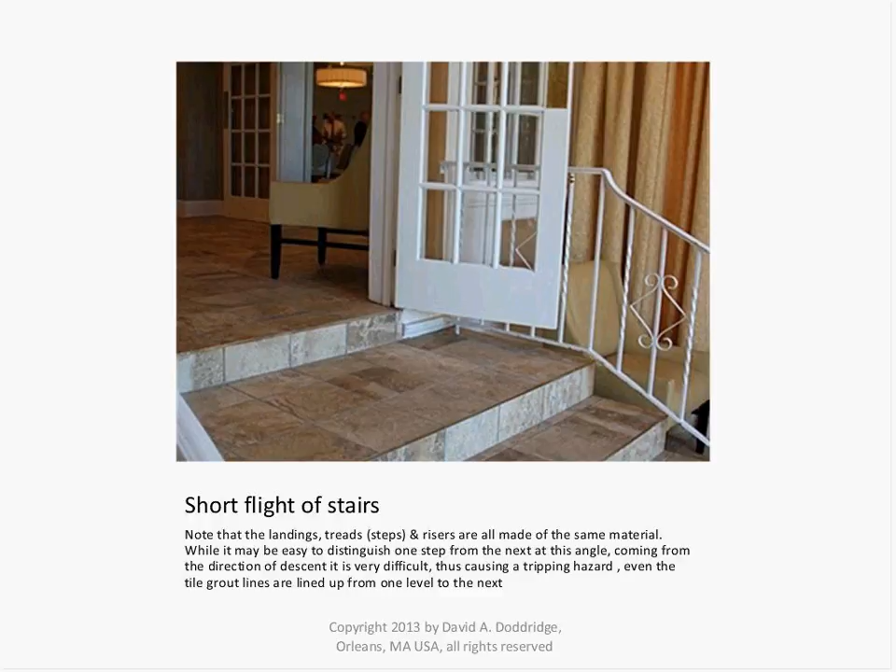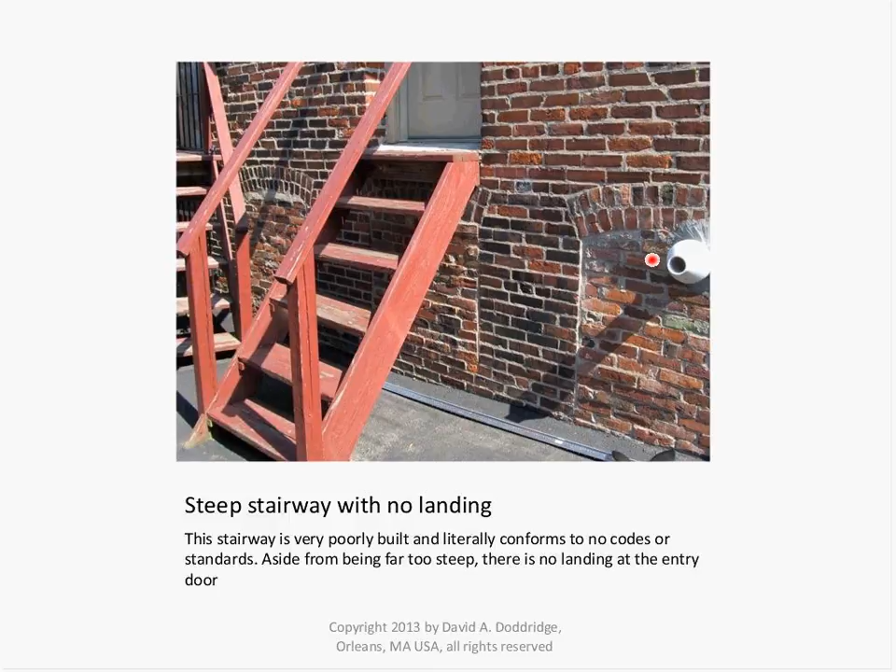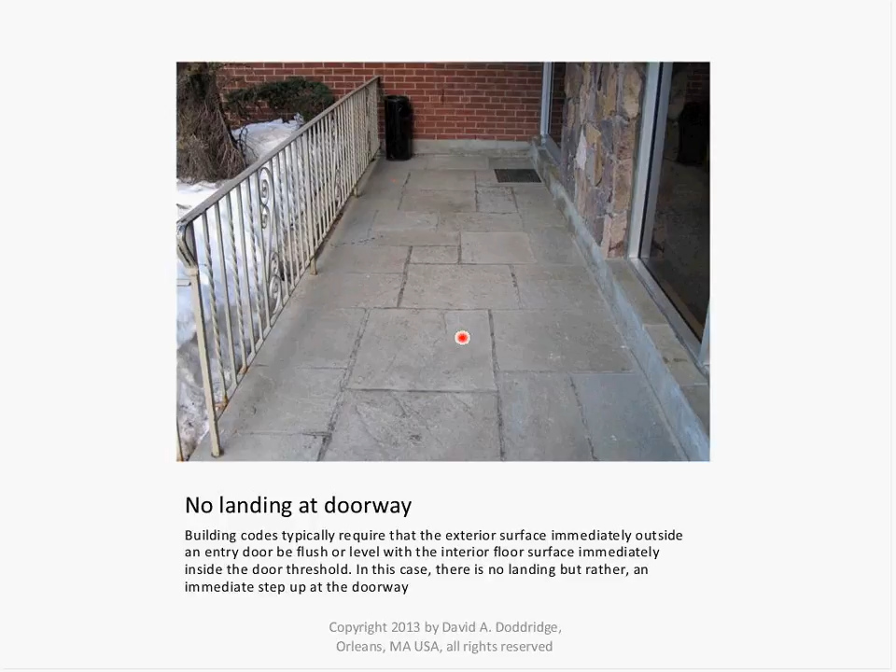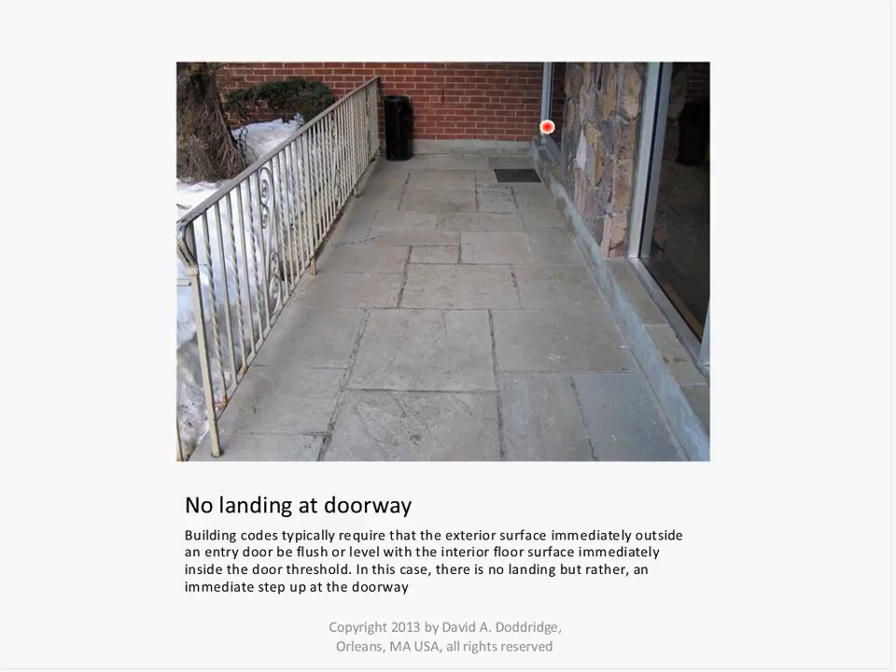This is an example of a step immediately at a door. This is a trip step at an ATM kiosk in Massachusetts. You wouldn't think much of this. However, you can see this shelf just inside the door. This is an obstruction within the path of travel, so this shelf shouldn't be there.

The woman opened the door, which opens out. The door closing speed was considerable. It closed pretty quickly behind her, causing her to trip on the step at the door sill and fall, and actually fractured her larynx right on this corner. So she really got hurt. And it still exists in this exact same condition today. They haven't fixed it.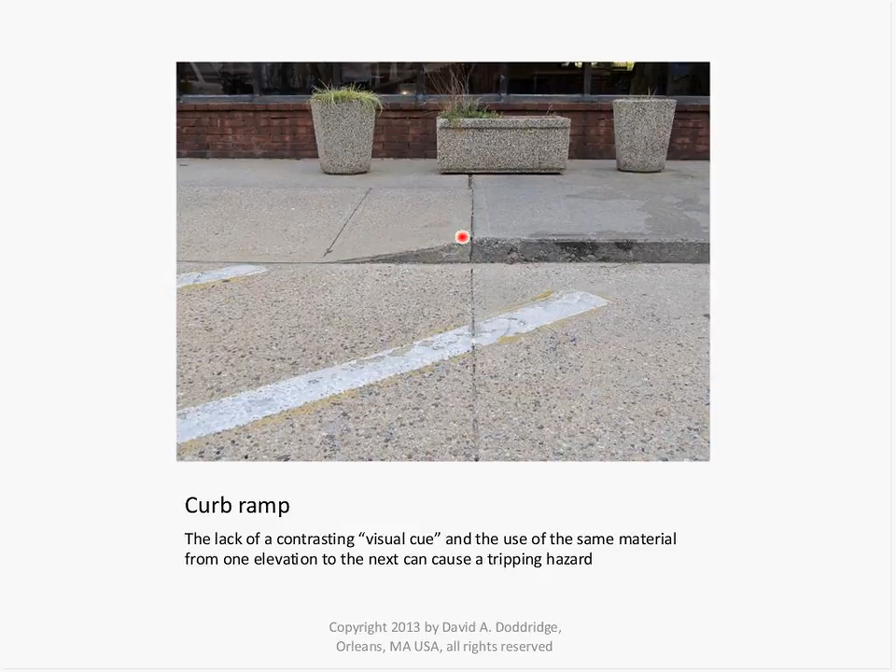That's why you really want to preserve the scene, get witness statements, and take as many pictures, gather as much data as you possibly can. Go there, hopefully under the same conditions. If he was there at night, you want to go there at night and see if the lighting was okay, if there's a bulb that was burnt out, not replaced, that kind of thing.

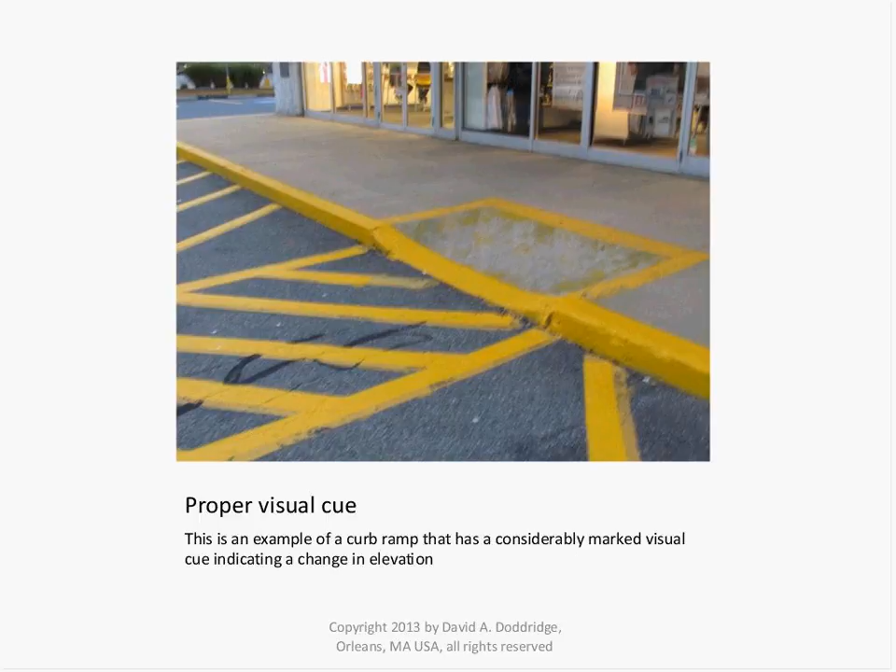This is a ramp in New York City. This edge was about 1.5 inches high. They could have constructed this ramp so that it was flush with the sidewalk, but they didn't. A pedestrian came in this direction, went to walk up the ramp, caught his foot on this leading edge, and fell. So things that look good may not necessarily be good.

You have to keep that in mind as well.

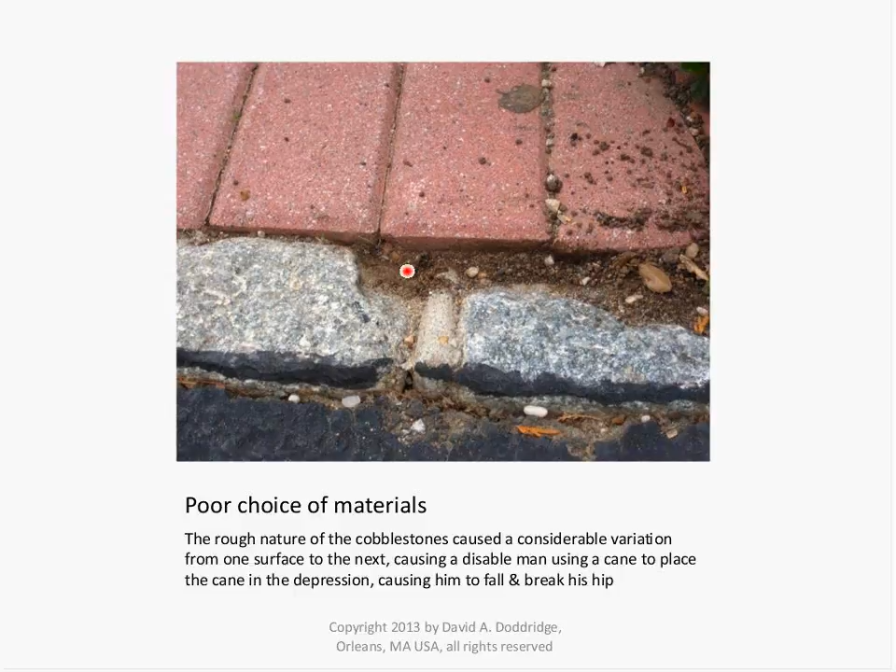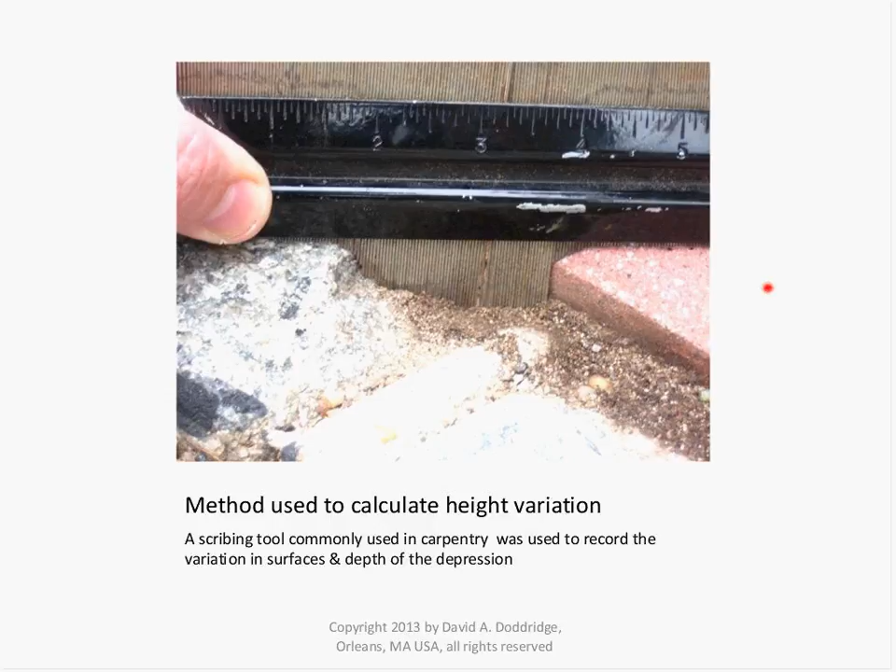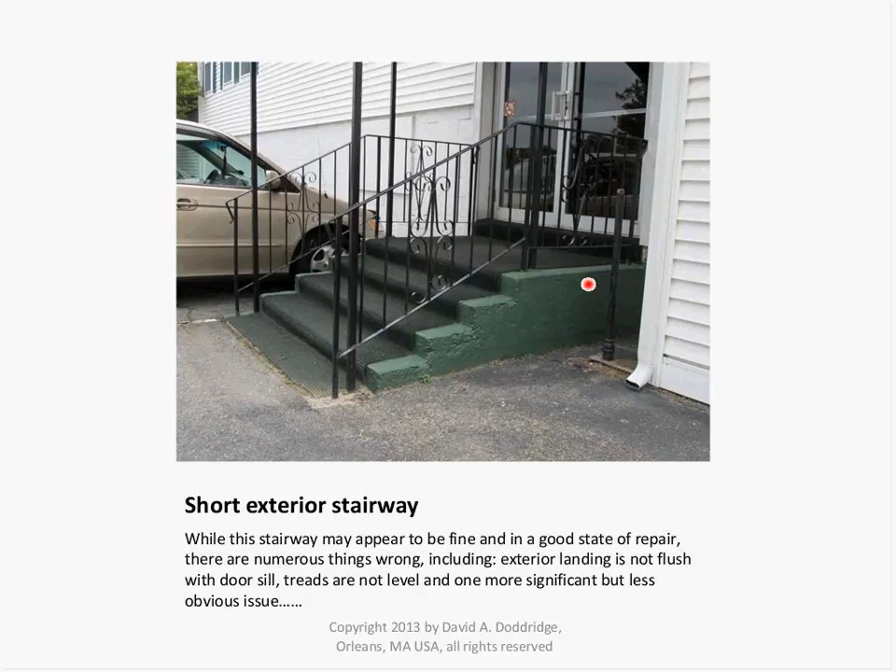The ASTM guide F1637 that I discussed earlier calls for a visual cue, a contrasting stripe right along the leading edge, to warn users that there is a step there. Modern building codes may or may not apply here. I haven't gotten that far in the case yet, but this landing really should be flush with the floor surface.

There's something else in this stairway you may be looking at and not really notice: this door opens up against the handrail. It obstructs the handrail, so it's really not doing anything until you get to the first step. If you fall here, you don't have any handrail to grab onto because the door is in the way. That's just a simple design consideration.

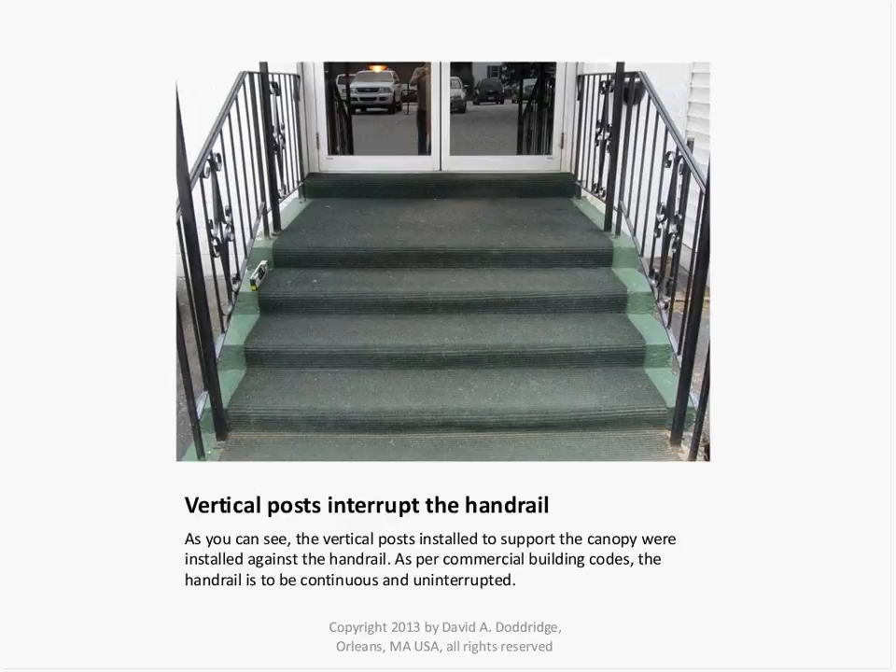Okay, excellent. We have a question here from Charles who asks, can you go over stairs that are covered by carpet, and does that make matters worse, especially if handrails are not present?

Stairs that are covered by carpet, that's an interesting question, actually. The organization I belong to, the NFSI, National Floor Safety Institute, has a wall of shame in the office with photographs of all sorts of different hazards. One of them is a big carpeted stairway in what looks to be like a casino, a substantial commercial building, and the stairway is carpeted with the exact same carpeting as the floor. So it all blends together. In the direction of descent, if the carpeting is the same, there's really no visual cue.

Where the stairway starts, the solution is really quite simple. They could use a different carpeting on the stairway. They could run it in an opposing pattern to identify that there is a stair there. On that tiled stairway that I showed you earlier, they could have simply chosen a different pattern for that landing and run the tile, say, diagonally. There are simple solutions to mitigating these hazards.